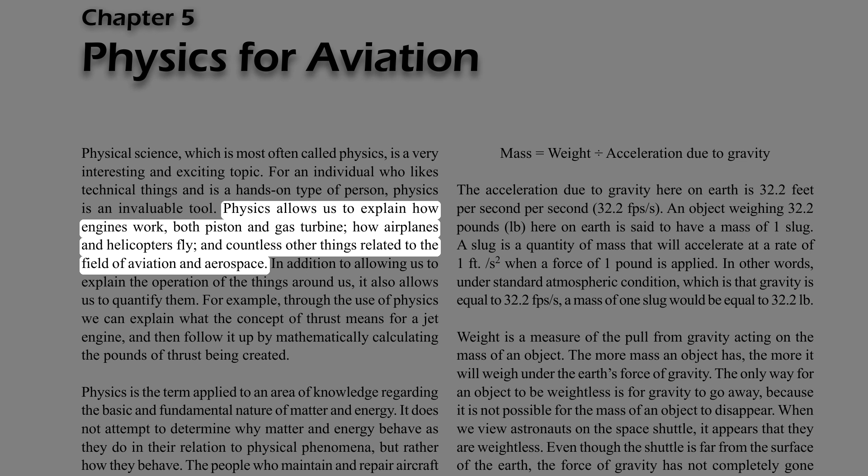In addition to allowing us to explain the operation of the things around us, it also allows us to quantify them. For example, through the use of physics we can explain what the concept of thrust means for a jet engine, and then follow it up by mathematically calculating the pounds of thrust being created.

Physics is the term applied to an area of knowledge regarding the basic and fundamental nature of matter and energy. It does not attempt to determine why matter and energy behave as they do in their relation to physical phenomena, but rather how they behave.

The people who maintain and repair aircraft should have knowledge of basic physics, which is sometimes called the science of matter and energy. Matter is the foundation, or the building blocks, for any discussion of physics. According to the dictionary, matter is what all things are made of, whatever occupies space, has mass, and is perceptible to the senses in some way.

According to the law of conservation, matter cannot be created or destroyed, although it is possible to change its physical state. When liquid gasoline vaporizes and mixes with air, and then burns, it might seem that this piece of matter has disappeared and no longer exists. Although it no longer exists in the state of liquid gasoline, the matter still exists in the form of the gases given off by the burning fuel.

Characteristics of matter: mass and weight. Mass is a measure of the quantity of matter in an object. In other words, how many molecules are in the object, how many atoms are in the object, or to be more specific, how many protons, neutrons, and electrons are in the object.

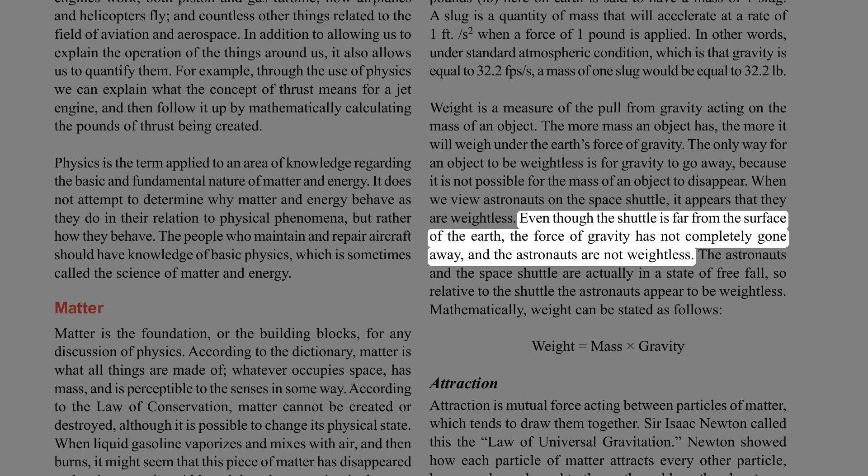When we view astronauts on the space shuttle, it appears that they are weightless. Even though the shuttle is far from the surface of the Earth, the force of gravity has not completely gone away, and the astronauts are not weightless. The astronauts and the space shuttle are actually in a state of free fall, so relative to the shuttle the astronauts appear to be weightless.

Mathematically, weight can be stated as follows: weight equals mass times gravity.

Attraction is a mutual force acting between particles of matter, which tends to draw them together. Sir Isaac Newton called this the law of universal gravitation. Newton showed how each particle of matter attracts every other particle, how people are bound to the Earth, and how the planets are attracted in the solar system.

Porosity means having pores or spaces where smaller particles may fit when a mixture takes place. This is sometimes referred to as granular, consisting or appearing to consist of small grains or granules.

Impenetrability means that no two objects can occupy the same place at the same time. Thus, two portions of matter cannot at the same time occupy the same space.

Density is the weight of a substance per unit volume. The unit volume selected for use in the English system of measurement is 1 cubic foot (ft³). In the metric system, it is 1 cubic centimeter (cm³).

Density is expressed in pounds per cubic foot or grams per cubic centimeter. To find the density of a substance, its weight and volume must be known. Its weight is then divided by its volume to find the weight per unit volume.

For example, the liquid which fills a certain container weighs 1,497.6 lb. The container is 4 feet long, 3 feet wide and 2 feet deep. Its volume is 24 cubic feet: 4 feet times 3 feet times 2 feet. If 24 cubic feet of liquid weighs 1,497.6 pounds, then 1 cubic foot weighs 1,497.6 divided by 24, or 62.4 lb. Therefore, the density of the liquid is 62.4 pounds per cubic foot.

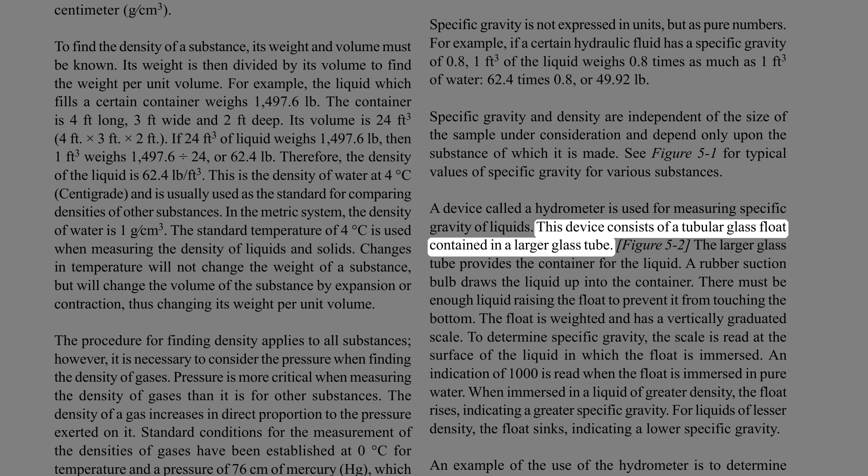See Figure 5:1 for typical values of specific gravity for various substances. A device called a hydrometer is used for measuring specific gravity of liquids. This device consists of a tubular glass float contained in a larger glass tube, which provides the container for the liquid. A rubber suction bulb draws the liquid up into the container.

There must be enough liquid raising the float to prevent it from touching the bottom. The float is weighted and has a vertically graduated scale. To determine specific gravity, the scale is read at the surface of the liquid in which the float is immersed. An indication of 1000 is read when the float is immersed in pure water. When immersed in a liquid of greater density, the float rises, indicating a greater specific gravity. For liquids of lesser density, the float sinks, indicating a lower specific gravity.

An example of the use of the hydrometer is to determine the specific gravity of the electrolyte, battery liquid, in an aircraft battery. When a battery is discharged, the calibrated float immersed in the electrolyte will indicate approximately 1150. The indication of a charged battery is between 1275 and 1310. These values represent 1.150, 1.275, and 1.310. The electrolyte in a discharged battery is 1.15 times denser than water, and in a charged battery 1.275 to 1.31 times denser than water.

Energy is typically defined as something that gives us the capacity to perform work. As individuals, saying that we feel full of energy is an indicator that we can perform a lot of work. Energy can be classified as one of two types, either as potential energy or kinetic energy.

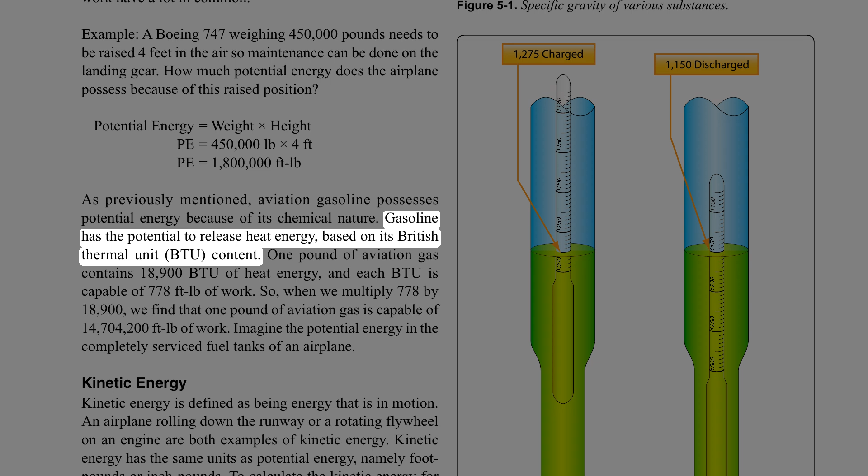As previously mentioned, aviation gasoline possesses potential energy because of its chemical nature. Gasoline has the potential to release heat energy, based on its British thermal unit, or BTU, content. One pound of aviation gas contains 18,900 BTU of heat energy, and each BTU is capable of 778 foot-pounds of work. So when we multiply 778 by 18,900, we find that 1 pound of aviation gas is capable of 14,704,200 foot-pounds of work. Imagine the potential energy in the completely serviced fuel tanks of an airplane.

Kinetic energy is defined as energy that is in motion. An airplane rolling down the runway or a rotating flywheel on an engine are both examples of kinetic energy. Kinetic energy has the same units as potential energy, namely foot-pounds or inch-pounds.

To calculate the kinetic energy for something in motion, the following formula is used: kinetic energy equals one-half mass times velocity squared. To use the formula, we show the mass as weight divided by gravity, and the velocity of the object will be in feet per second. This is necessary to end up with units in foot-pounds.

Example: an Airbus A380 weighing 600,000 pounds is moving down the runway on its takeoff roll with a velocity of 200 feet per second. How many foot-pounds of kinetic energy does the airplane possess?

Force, work, power, and torque. Force: before the concept of work, power, or torque can be discussed, we need to understand what force means. According to the dictionary, force is the intensity of an impetus, or the intensity of an input.

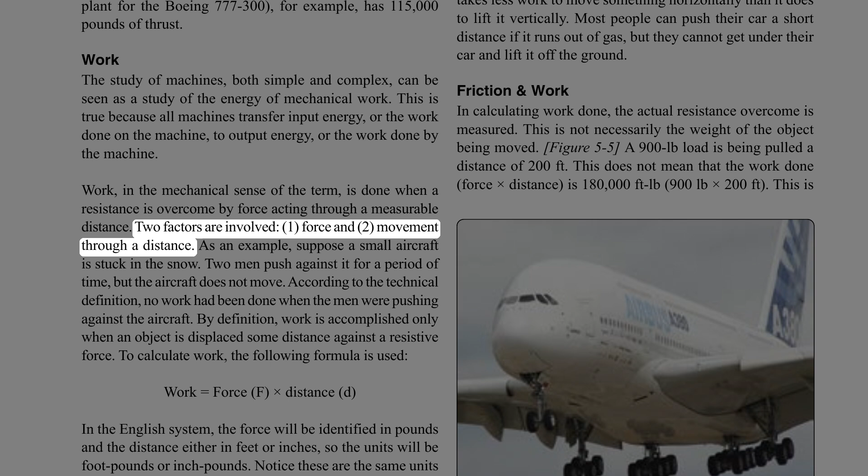As an example, suppose a small aircraft is stuck in the snow. Two men push against it for a period of time, but the aircraft does not move. According to the technical definition, no work had been done when the men were pushing against the aircraft. By definition, work is accomplished only when an object is displaced some distance against a resistive force. To calculate work, the following formula is used.

Work equals force, F, times distance, D. In the English system, the force will be identified in pounds and the distance either in feet or inches, so the units will be foot-pounds or inch-pounds. Notice these are the same units that were used for potential and kinetic energy.

In the metric system, the force is identified in newtons, N, and the distance in meters, with the resultant units being joules. 1 pound of force is equal to 4.448 N and 1 meter is equal to 3.28 feet. 1 joule is equal to 0.74 foot-pounds.

Example: How much work is accomplished by jacking a 150,000-pound Airbus A320 airplane a vertical height of 4 feet?

Example: How much work is accomplished when a tow tractor is hooked up to a tow bar and a Boeing 737-800 airplane weighing 130,000 pounds is pushed 80 feet into the hangar? The force on the tow bar is 5,000 lb.

In this last example, notice the force does not equal the weight of the airplane. This is because the airplane is being moved horizontally and not lifted vertically. In almost all cases, it takes less work to move something horizontally than it does to lift it vertically. Most people can push their car a short distance if it runs out of gas, but they cannot get under their car and lift it off the ground.

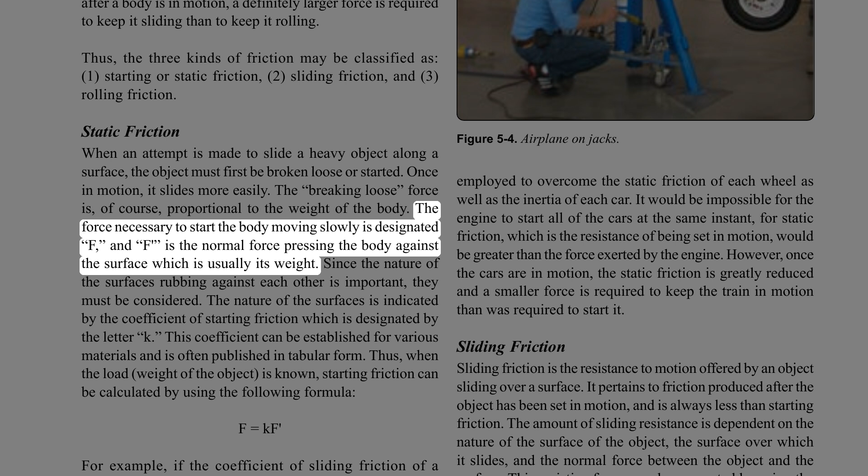Static friction. When an attempt is made to slide a heavy object along a surface, the object must first be broken loose or started. Once in motion, it slides more easily. The breaking loose force is, of course, proportional to the weight of the body. The force necessary to start the body moving slowly is designated F, and F is the normal force pressing the body against the surface, which is usually its weight.

Since the nature of the surfaces rubbing against each other is important, they must be considered. The nature of the surfaces is indicated by the coefficient of starting friction, which is designated by the letter K. This coefficient can be established for various materials and is often published in tabular form. Thus, when the load, weight of the object, is known, starting friction can be calculated by using the following formula.

For example, if the coefficient of sliding friction of a smooth iron block on a smooth, horizontal surface is 0.3, the force required to start a 10-pound block would be 3 pounds, and a 40-pound block, 12 lb. Starting friction for objects equipped with wheels and roller bearings is much smaller than that for sliding objects.

For example, a locomotive would have difficulty getting a long train of cars in motion all at one time. Therefore, the couplings between the cars are purposely made to have a few inches of play. When starting the train, the engineer backs the engine until all the cars are pushed together. Then, with a quick start forward, the first car is set in motion. This technique is employed to overcome the static friction of each wheel as well as the inertia of each car.

It would be impossible for the engine to start all of the cars at the same instant, for static friction, which is the resistance of being set in motion, would be greater than the force exerted by the engine. However, once the cars are in motion, the static friction is greatly reduced and a smaller force is required to keep the train in motion than was required to start it.

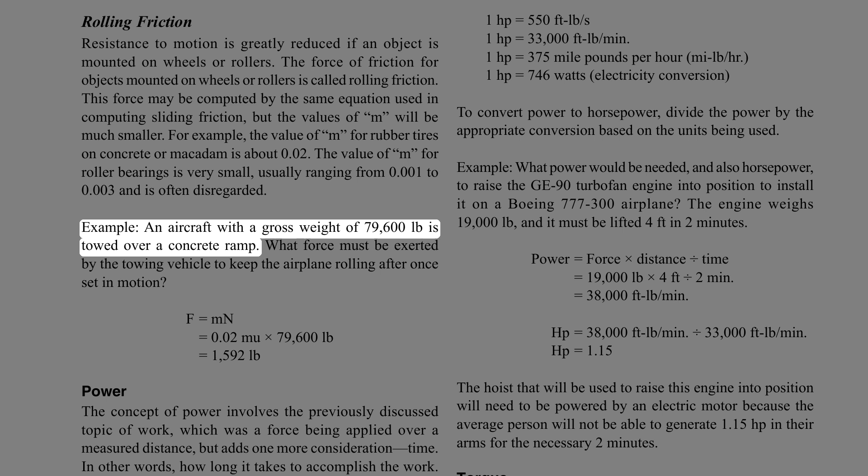Example: an aircraft with a gross weight of 79,600 pounds is towed over a concrete ramp. What force must be exerted by the towing vehicle to keep the airplane rolling after once set in motion?

Power. The concept of power involves the previously discussed topic of work, which was a force being applied over a measured distance, but adds one more consideration: time. In other words, how long it takes to accomplish the work.

If someone asked the average person if they could lift 1 million pounds 5 feet off the ground, the answer most assuredly would be no. This person would probably assume that they are to lift it all at once. What if they are given 365 days to lift it, and could lift small amounts of weight at a time?

The work involved would be the same, regardless of how long it took to lift the weight, but the power required is different. If the weight is to be lifted in a shorter period of time, it will take more power. The formula for power is as follows.

The units for power will be foot-pounds per minute, foot-pounds per second, inch-pounds per minute or second, and possibly mile-pounds per hour. The units depend on how distance and time are measured.

Many years ago, there was a desire to compare the power of the newly evolving steam engine to that of horses. People wanted to know how many horses the steam engine was equivalent to.

The value we know currently as 1 horsepower, HP, was developed, and it is equal to 550 foot-pounds per second, because of this. It was found that the average horse could lift a weight of 550 pounds, 1 foot off the ground, in 1 second. The values we use today, in order to convert power to horsepower, are as follows.

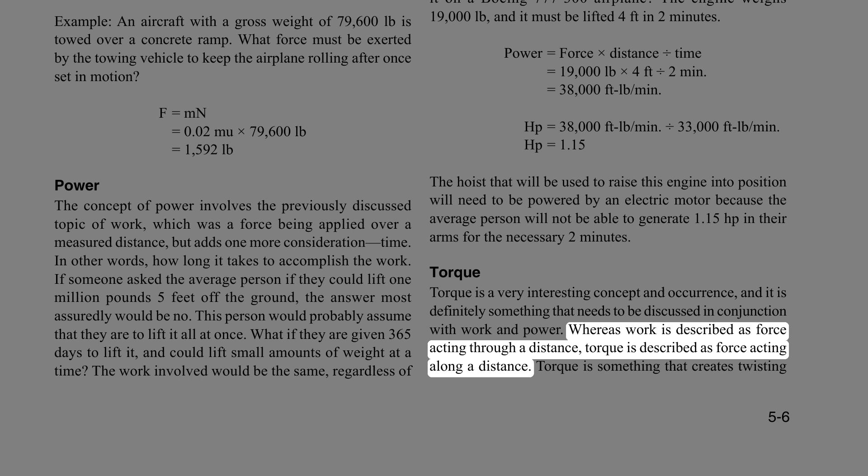Torque. Torque is a very interesting concept and occurrence, and it is definitely something that needs to be discussed in conjunction with work and power. Whereas work is described as force acting through a distance, torque is described as force acting along a distance. Torque is something that creates twisting and tries to make something rotate.

If we push on an object with a force of 10 pounds and it moves 10 inches in a straight line, we have done 100 inch-pounds of work.

By comparison, if we have a wrench 10 inches long that is on a bolt, and we push down on it with a force of 10 pounds, a torque of 100 pound-inches is applied to the bolt. If the bolt was already tight and did not move as we pushed down on the wrench, the torque of 100 pound-inches would still exist.

The formula for torque is torque equals force times distance. Even though this formula looks the same as the formula for calculating work, recognize that the distance value here is not the linear distance an object moves, but rather the distance along which the force is applied. With torque, nothing had to move, because the force is applied along a distance, not through a distance. Although the units of work and torque appear the same, they are not. The units of work are inch-pounds, and the units of torque are pound-inches, and that is what differentiates the two.

Torque is very important when thinking about how engines work, both piston engines and gas turbine engines. Both types of engines create torque in advance of being able to create work or power.

With a piston engine, a force in pounds pushes down on the top of the piston and tries to make it move. The piston is attached to the connecting rod, which is attached to the crankshaft at an offset. That offset would be like the length of the wrench discussed earlier, and the force acting along that length is what creates torque.

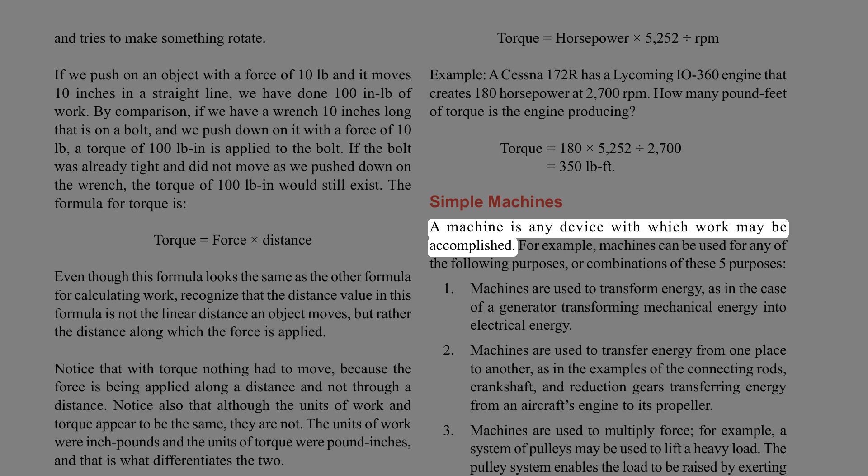Simple machines. A machine is any device with which work may be accomplished. Machines can be used for any of the following purposes, or combinations of these purposes.

Machines are used to transform energy, as in the case of a generator transforming mechanical energy into electrical energy. Machines are used to transfer energy from one place to another, as in the examples of the connecting rods, crankshaft, and reduction gears transferring energy from an aircraft's engine to its propeller.

Machines are used to multiply force. For example, a system of pulleys may be used to lift a heavy load. The pulley system enables the load to be raised by exerting a force that is smaller than the weight of the load.

Machines can be used to multiply speed. A good example is the bicycle, by which speed can be gained by exerting a greater force.

Machines can be used to change the direction of a force. An example of this use is the flag hoist. A downward force on one side of the rope exerts an upward force on the other side, raising the flag toward the top of the pole.

There are only 6 simple machines: the lever, the pulley, the wheel and axle, the inclined plane, the screw, and the gear. Physicists, however, recognize only 2 basic principles in machines, the lever and the inclined plane. The pulley, block and tackle, the wheel and axle, and gears operate on the machine principle of the lever. The wedge and the screw use the principle of the inclined plane.

An understanding of the principles of simple machines provides a necessary foundation for the study of compound machines, which are combinations of 2 or more simple machines.

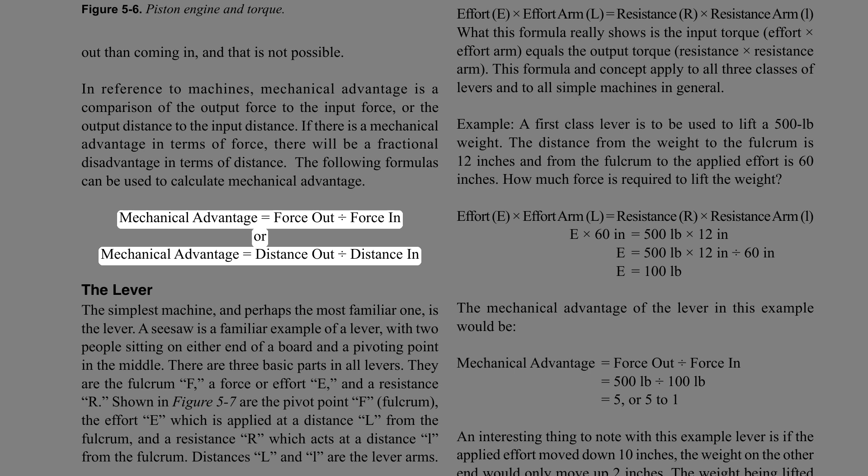The lever. The simplest machine, and perhaps the most familiar one, is the lever. A seesaw is a familiar example of a lever, with 2 people sitting on either end of a board and a pivoting point in the middle.

There are 3 basic parts in all levers: the fulcrum, F, a force or effort, E, and a resistance, R. Shown in figure 5-7 are the pivot point, F, fulcrum, the effort, E, which is applied at a distance, L, from the fulcrum, and a resistance, R, which acts at a distance, L, from the fulcrum. Distances, L, and L, are the lever arms.

The concept of torque was discussed earlier in this chapter, and torque is very much involved in the operation of a lever. When a person sits on one end of a seesaw, that person applies a downward force in pounds which acts along the distance to the center of the seesaw. This combination of force and distance creates torque, which tries to cause rotation.

First-class lever. In the first-class lever, the fulcrum is located between the effort and the resistance. As mentioned earlier, the seesaw is a good example of a lever, and it happens to be a first-class lever. The amount of weight and the distance from the fulcrum can be varied to suit the need. Increasing the distance from the applied effort to the fulcrum, compared to the distance from the fulcrum to the weight being moved, increases the advantage provided by the lever.

Crowbars, shears, and pliers are common examples of this class of lever. The proper balance of an airplane is also a good example, with the center of lift on the wing being the pivot point, or fulcrum, and the weight fore and aft of this point being the effort and the resistance.

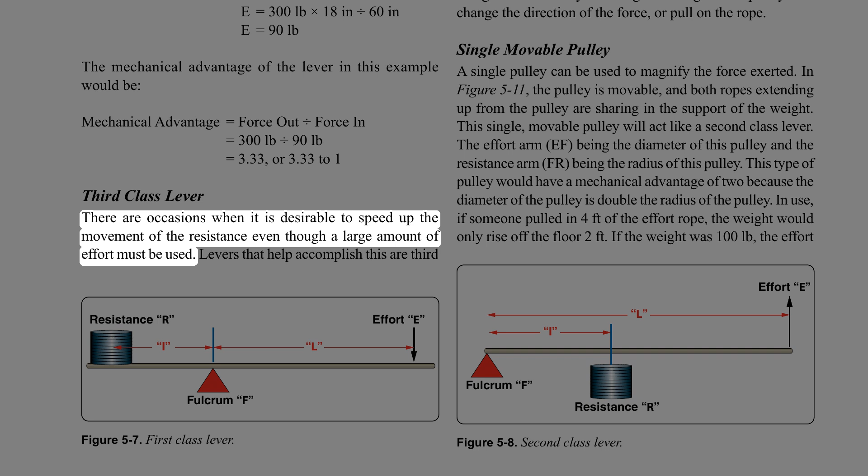There are occasions when it is desirable to speed up the movement of the resistance even though a large amount of effort must be used. Levers that help accomplish this are third-class levers.

As shown in Figure 5-9, the fulcrum is at one end of the lever and the weight or resistance to be overcome is at the other end, with the effort applied at some point between. Third-class levers are easily recognized because the effort is applied between the fulcrum and the resistance.

The retractable main landing gear on an airplane is a good example of a third-class lever. The top of the landing gear, where it attaches to the airplane, is the pivot point. The wheel and brake assembly at the bottom of the landing gear is the resistance. The hydraulic actuator that makes the gear retract is attached somewhere in the middle, and that is the applied effort.

The pulley. Pulleys are simple machines in the form of a wheel mounted on a fixed axis and supported by a frame. The wheel, or disc, is normally grooved to accommodate a rope. The wheel is sometimes referred to as a sheave, or sometimes sheaf. The frame that supports the wheel is called a block.

A block and tackle consists of a pair of blocks. Each block contains one or more pulleys and a rope connecting the pulleys of each block.

Single fixed pulley. A single fixed pulley is really a first-class lever with equal arms. In Figure 5-10, the arm from point R to point F is equal to the arm from point F to point E, with both distances being equal to the radius of the pulley. When a first-class lever has equal arms, the mechanical advantage is 1.

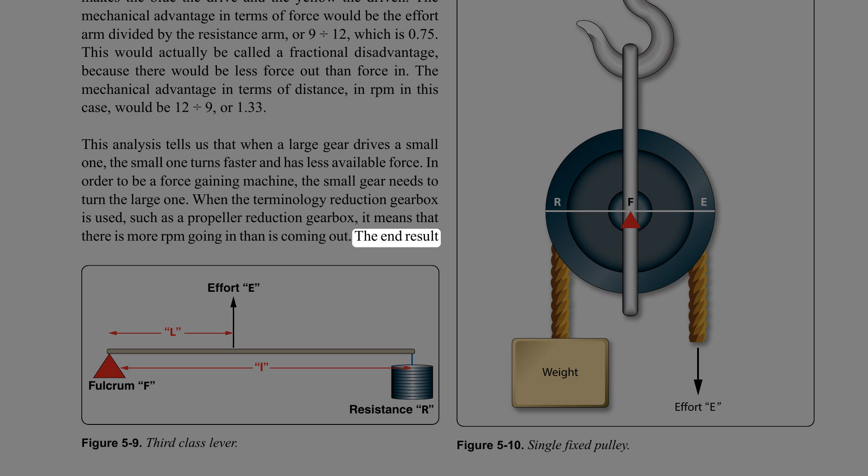In order to be a force-gaining machine, the small gear needs to turn the large one. When the terminology reduction gearbox is used, such as a propeller reduction gearbox, it means that there is more RPM going in than is coming out. The end result is an increase in force and ultimately torque.

Bevel gears are used to change the plane of rotation, so that a shaft turning horizontally can make a vertical shaft rotate. The size of the gears and their number of teeth determine the mechanical advantage, and whether force is being increased or RPM is being increased. If each gear has the same number of teeth, there would be no change in force or RPM.

The worm gear has an extremely high mechanical advantage. The input force goes into the spiral worm gear, which drives the spur gear. One complete revolution of the worm gear only makes the spur gear move an amount equal to one tooth. The mechanical advantage is equal to the number of teeth on the spur gear, which in this case there are 25. This is a force-gaining machine, to the tune of 25 times more output force.

The planetary sun gear system is typical of what would be found in a propeller reduction gearbox. The power output shaft of the engine would drive the sun gear in the middle, which rotates the planetary gears and ultimately the ring gear.

In this example, the sun gear has 28 teeth, each planet gear has 22 teeth, and the ring gear has 82 teeth. To figure how much gear reduction is taking place, the number of teeth on the ring gear is divided by the number of teeth on the sun gear. In this case, the gear reduction is 2.93, meaning the engine has an RPM 2.93 times greater than the propeller.

Inclined plane. The inclined plane is a simple machine that facilitates the raising or lowering of heavy objects by application of a small force over a relatively long distance.

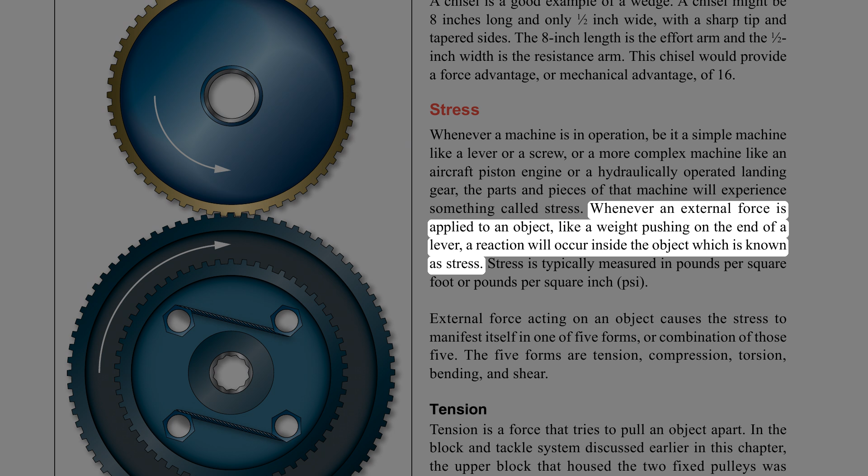Whenever an external force is applied to an object, like a weight pushing on the end of a lever, a reaction will occur inside the object which is known as stress. Stress is typically measured in pounds per square foot or pounds per square inch, psi.

External force acting on an object causes the stress to manifest itself in one of five forms, or a combination of those five: tension, compression, torsion, bending, and shear. Tension is a force that tries to pull an object apart.

In the block and tackle system discussed earlier in this chapter, the upper block that housed the two fixed pulleys was secured to an overhead beam. The movable lower block and its two pulleys were hanging by ropes, and the weight was hanging below the entire assembly. The weight being lifted would cause the ropes and the blocks to be under tension. The weight is literally trying to pull the rope apart, and ultimately would cause the rope to break if the weight was too great.

Compression is a force that tries to crush an object. An excellent example of compression is when a sheet metal airplane is assembled using the fastener known as a rivet. The rivet passes through a hole drilled in the pieces of aluminum, and then a rivet gun on one side and a bucking bar on the other apply a force. This applied force tries to crush the rivet, and makes it expand to fill the hole and securely hold the aluminum pieces together.

Torsion is the stress an object experiences when it is twisted, which is what happens when torque is applied to a shaft. Torsion is made up of two other stresses, tension and compression. When a shaft is twisted, tension is experienced at a diagonal to the shaft and compression acts 90 degrees to the tension.

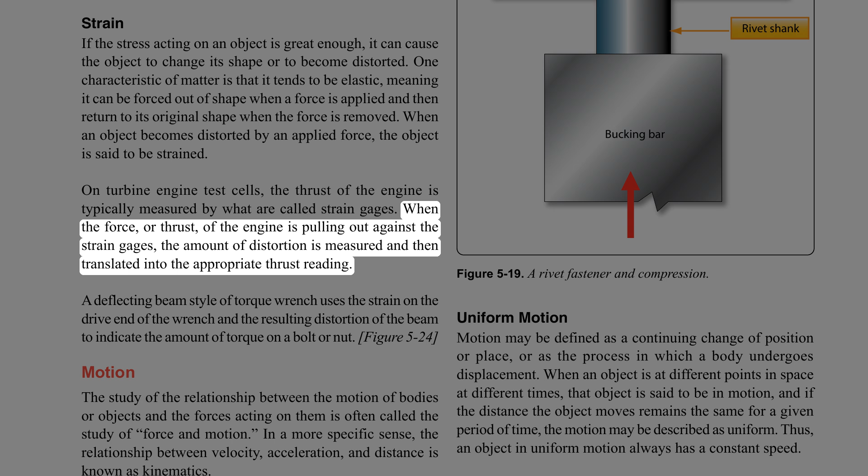On turbine engine test cells, the thrust of the engine is typically measured by what are called strain gauges. When the force or thrust of the engine is pulling out against the strain gauges, the amount of distortion is measured and then translated into the appropriate thrust reading. A deflecting beam style of torque wrench uses the strain on the drive end of the wrench and the resulting distortion of the beam to indicate the amount of torque on a bolt or nut.

Motion: the study of the relationship between the motion of bodies or objects and the forces acting on them is often called the study of force and motion. In a more specific sense, the relationship between velocity, acceleration, and distance is known as kinematics.

Uniform motion. Motion may be defined as a continuing change of position or place, or as the process in which a body undergoes displacement. When an object is at different points in space at different times, that object is said to be in motion, and if the distance the object moves remains the same for a given period of time, the motion may be described as uniform. Thus, an object in uniform motion always has a constant speed.

Speed and velocity. In everyday conversation, speed and velocity are often used as if they mean the same thing. In physics, they have definite and distinct meanings. Speed refers to how fast an object is moving, or how far the object will travel in a specific time. The speed of an object tells nothing about the direction an object is moving.

For example, if the information is supplied that an airplane leaves New York City and travels 8 hours at a speed of 150 miles per hour, this information tells nothing about the direction in which the airplane is moving. At the end of 8 hours, it might be in Kansas City, or if it traveled in a circular route, it could be back in New York City.

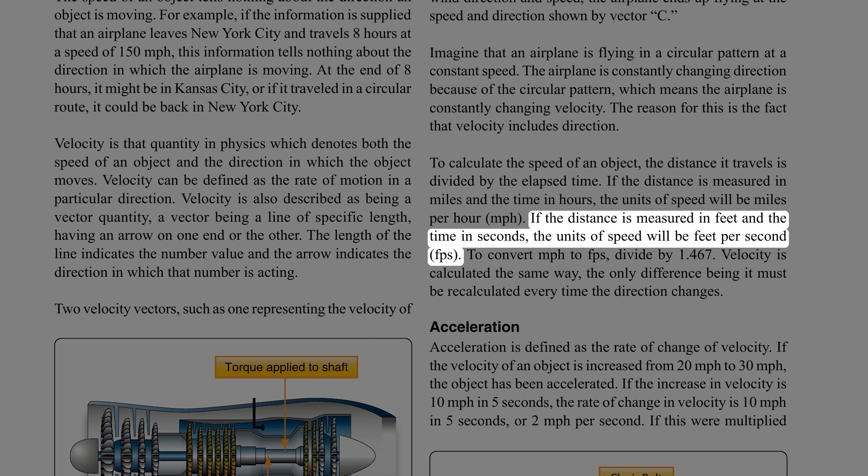To calculate the speed of an object, the distance it travels is divided by the elapsed time. If the distance is measured in miles and the time in hours, the units of speed will be miles per hour, mph. If the distance is measured in feet and the time in seconds, the units of speed will be feet per second, fps. To convert mph to fps, divide by 1.467.

Velocity is calculated the same way, the only difference being it must be recalculated every time the direction changes.

Acceleration. Acceleration is defined as the rate of change of velocity. If the velocity of an object is increased from 20 miles per hour to 30 miles per hour, the object has been accelerated. If the increase in velocity is 10 miles per hour in 5 seconds, the rate of change in velocity is 10 miles per hour in 5 seconds, or 2 miles per hour per second. If this were multiplied by 1.467, it could also be expressed as an acceleration of 2.93 feet per second squared, fps squared. By comparison, the acceleration due to gravity is 32.2 fps squared.

To calculate acceleration, the following formula is used. Example: an Air Force F-15 fighter is cruising at 400 miles per hour. The pilot advances the throttles to full afterburner and accelerates to 1,200 miles per hour in 20 seconds. What is the average acceleration in miles per hour per second and in fps squared?

In the example just shown, the acceleration was found to be 58.7 fps squared. Since 32.2 fps squared is equal to the acceleration due to gravity, divide the F-15's acceleration by 32.2 to find out how many g-forces the pilot is experiencing. In this case, it would be 1.82 g's.

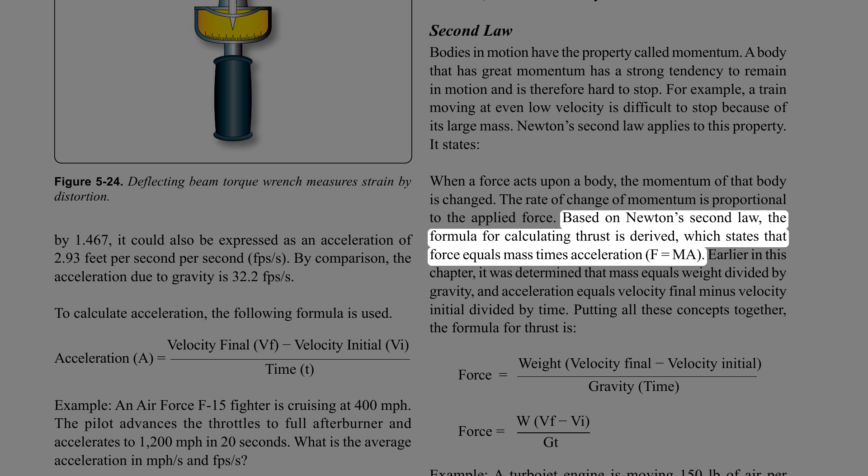Based on Newton's second law, the formula for calculating thrust is derived, which states that force equals mass times acceleration, F equals ma. Earlier in this chapter, it was determined that mass equals weight divided by gravity, and acceleration equals velocity final minus velocity initial divided by time.

Putting all these concepts together, the formula for thrust is derived. Example: a turbojet engine is moving 150 pounds of air per second through the engine. The air enters going 100 fps and leaves going 1200 fps. How much thrust, in pounds, is the engine creating?

Third law. Newton's third law of motion is often called the law of action and reaction. It states that for every action there is an equal and opposite reaction. This means that if a force is applied to an object, the object will supply a resistive force exactly equal to and in the opposite direction of the force applied.

It is easy to see how this might apply to objects at rest. In application, as a man stands on the floor, the floor exerts a force against his feet exactly equal to his weight. This law is also applicable when a force is applied to an object in motion.

Forces always occur in pairs. The term acting force means the force one body exerts on a second body, and reacting force means the force the second body exerts on the first.

When an aircraft propeller pushes a stream of air backward with a force of 500 pounds, the air pushes the blades forward with a force of 500 lb. This forward force causes the aircraft to move forward.

A turbofan engine exerts a force on the air entering the inlet duct, causing it to accelerate out the fan duct and the tailpipe. The air accelerating to the rear is the action, and the force inside the engine that makes it happen is the reaction, also called thrust.

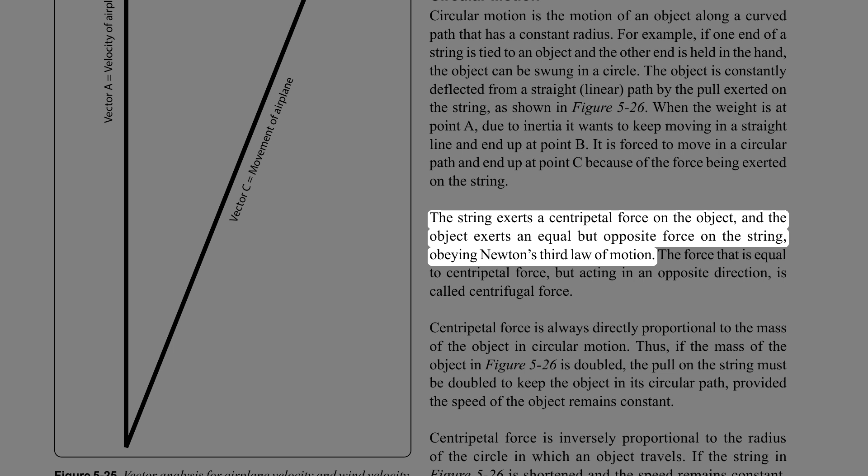It is forced to move in a circular path and end up at point C because of the force being exerted on the string. The string exerts a centripetal force on the object, and the object exerts an equal but opposite force on the string, obeying Newton's third law of motion.

The force that is equal to centripetal force, but acting in an opposite direction, is called centrifugal force. Centripetal force is always directly proportional to the mass of the object in circular motion. Thus, if the mass of the object in figure 5-26 is doubled, the pull on the string must be doubled to keep the object in its circular path, provided the speed of the object remains constant.

Centripetal force is inversely proportional to the radius of the circle in which an object travels. If the string in figure 5-26 is shortened and the speed remains constant, the pull on the string must be increased since the radius is decreased, and the string must pull the object from its linear path more rapidly.

Using the same reasoning, the pull on the string must be increased if the object is swung more rapidly in its orbit. Centripetal force is thus directly proportional to the square of the velocity of the object. The formula for centripetal force is: centripetal force equals mass times velocity squared, divided by radius.

For the formula above, mass would typically be converted to weight divided by gravity, velocity would be in feet per second, and the radius would be in feet.

Example: what would the centripetal force be if a 10-pound weight was moving in a 3 ft radius circular path at a velocity of 500 fps?

In the condition identified in the example, the object acts like it weighs 2,588 times more than it actually does. It can also be said that the object is experiencing 2,588 Gs, or force of gravity. The fan blades in a large turbofan engine, when operating at maximum RPM, are experiencing many thousands of Gs for the same reason.

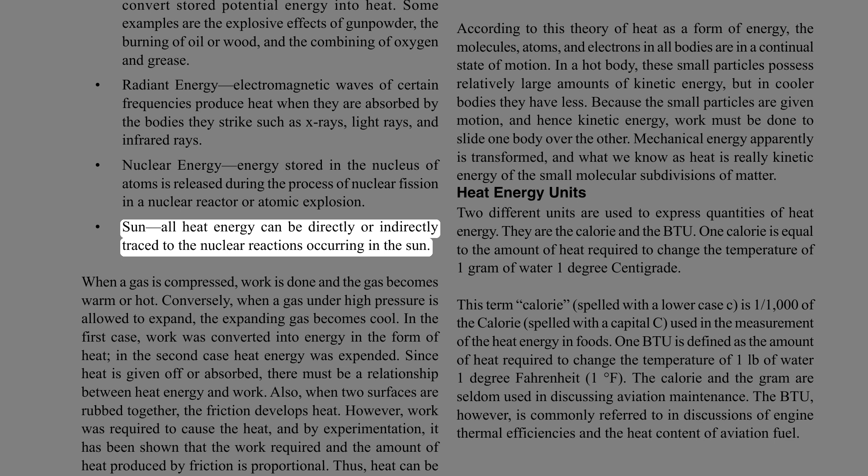Nuclear energy. Energy stored in the nucleus of atoms is released during the process of nuclear fission in a nuclear reactor or atomic explosion. Sun: all heat energy can be directly or indirectly traced to the nuclear reactions occurring in the sun.

When a gas is compressed, work is done and the gas becomes warm or hot. Conversely, when a gas under high pressure is allowed to expand, the expanding gas becomes cool. In the first case, work was converted into energy in the form of heat. In the second case, heat energy was expended. Since heat is given off or absorbed, there must be a relationship between heat energy and work.

Also, when two surfaces are rubbed together, the friction develops heat. However, work was required to cause the heat, and by experimentation it has been shown that the work required and the amount of heat produced by friction is proportional. Thus, heat can be regarded as a form of energy.

According to this theory of heat as a form of energy, the molecules, atoms, and electrons in all bodies are in a continual state of motion. In a hot body, these small particles possess relatively large amounts of kinetic energy, but in cooler bodies they have less. Because the small particles are given motion, and hence kinetic energy, work must be done to slide one body over the other. Mechanical energy apparently is transformed, and what we know as heat is really kinetic energy of the small molecular subdivisions of matter.

Heat energy units: two different units are used to express quantities of heat energy. They are the calorie and the BTU. One calorie is equal to the amount of heat required to change the temperature of 1 gram of water 1 degree centigrade. The term calorie, spelled with a lowercase c, is 1/1000th of the Calorie, spelled with a capital C, used in the measurement of the heat energy in foods.

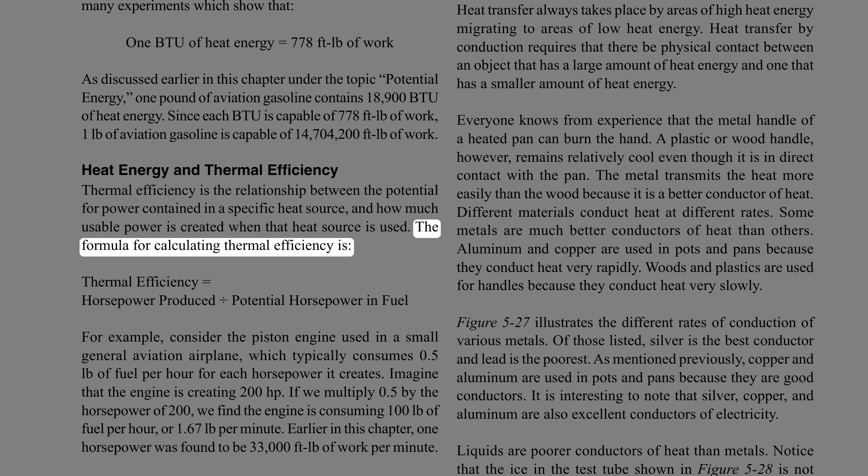The formula for calculating thermal efficiency is thermal efficiency equals horsepower produced divided by potential horsepower in fuel.

For example, consider the piston engine used in a small general aviation airplane, which typically consumes 0.5 pounds of fuel per hour for each horsepower it creates. Imagine that the engine is creating 200 horsepower. If we multiply 0.5 by the horsepower of 200, we find the engine is consuming 100 pounds of fuel per hour, or 1.67 pounds per minute.

Earlier in this chapter, 1 horsepower was found to be 33,000 feet lb of work per minute. The potential horsepower in the fuel burned for this example engine would be calculated. The example engine is burning enough fuel that it has the potential to create 744 horsepower, but it is only creating 200. The thermal efficiency of the engine would be such that more than 70% of the energy in the fuel is not being used to create usable horsepower.

The wasted energy is in the form of friction and heat. A tremendous amount of heat is given up to the atmosphere and not used inside the engine to create power.

Heat transfer. There are three methods by which heat is transferred from one location to another or from one substance to another. These three methods are conduction, convection, and radiation.

Conduction. Heat transfer always takes place by areas of high heat energy migrating to areas of low heat energy. Heat transfer by conduction requires that there be physical contact between an object that has a large amount of heat energy and one that has a smaller amount of heat energy.

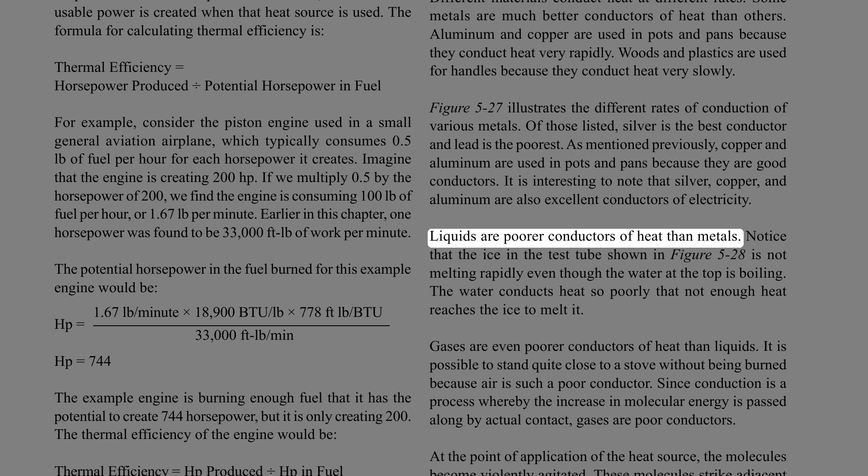Liquids are poorer conductors of heat than metals. Notice that the ice in the test tube shown in figure 5-28 is not melting rapidly even though the water at the top is boiling. The water conducts heat so poorly that not enough heat reaches the ice to melt it.

Gases are even poorer conductors of heat than liquids. It is possible to stand quite close to a stove without being burned because air is such a poor conductor.

Since conduction is a process whereby the increase in molecular energy is passed along by actual contact, gases are poor conductors. At the point of application of the heat source, the molecules become violently agitated. These molecules strike adjacent molecules, causing them to become agitated. This process continues until the heat energy is distributed evenly throughout the substance. The gases are much poorer conductors of heat because molecules are farther apart in gases than in solids.

Materials that are poor conductors are used to prevent the transfer of heat and are called heat insulators. A wooden handle on a pot or a soldering iron serves as a heat insulator. Certain materials, such as finely spun glass or asbestos, are particularly poor heat conductors. These materials are therefore used for many types of insulation.

Convection. Convection is the process by which heat is transferred by movement of a heated fluid, gas or liquid. For example, an incandescent light bulb will, when heated, become increasingly hotter until the air surrounding it begins to move. The motion of the air is upward. This upward motion of the heated air carries the heat away from the hot light bulb by convection.

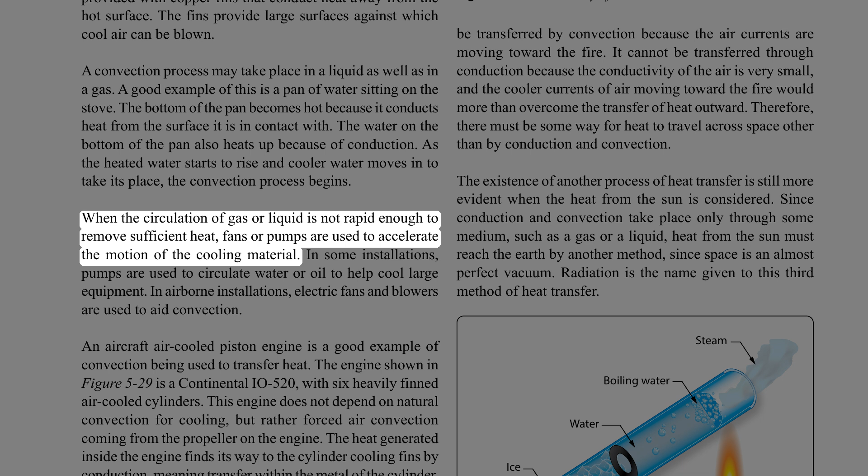When the circulation of gas or liquid is not rapid enough to remove sufficient heat, fans or pumps are used to accelerate the motion of the cooling material. In some installations, pumps are used to circulate water or oil to help cool large equipment. In airborne installations, electric fans and blowers are used to aid convection.

An aircraft air-cooled piston engine is a good example of convection being used to transfer heat. The engine shown in figure 5-29 is a Continental IO-520, with 6 heavily finned air-cooled cylinders. This engine does not depend on natural convection for cooling, but rather forced air convection coming from the propeller on the engine. The heat generated inside the engine finds its way to the cylinder cooling fins by conduction, meaning transfer within the metal of the cylinder. Once the heat gets to the fins, forced air flowing around the cylinders carries the heat away.

Radiation. Conduction and convection cannot wholly account for some of the phenomena associated with heat transfer. For example, the heat one feels when sitting in front of an open fire cannot be transferred by convection because the air currents are moving toward the fire. It cannot be transferred through conduction because the conductivity of the air is very small, and the cooler currents of air moving toward the fire would more than overcome the transfer of heat outward. Therefore, there must be some way for heat to travel across space other than by conduction and convection.

The existence of another process of heat transfer is still more evident when the heat from the sun is considered. Since conduction and convection take place only through some medium, such as a gas or a liquid, heat from the sun must reach the Earth by another method, since space is an almost perfect vacuum. Radiation is the name given to this third method of heat transfer.

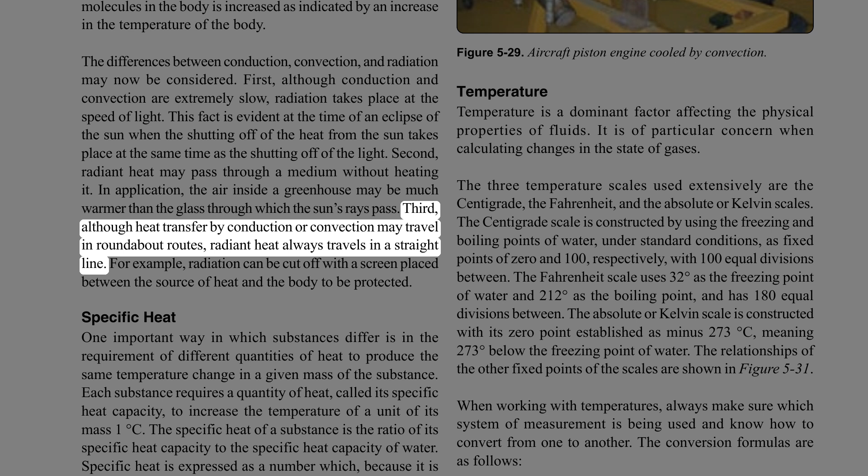Second, radiant heat may pass through a medium without heating it. For example, the air inside a greenhouse may be much warmer than the glass through which the sun's rays pass. Third, although heat transfer by conduction or convection may travel in roundabout routes, radiant heat always travels in a straight line. For example, radiation can be cut off with a screen placed between the source of heat and the body to be protected.

Specific heat. One important way in which substances differ is in the requirement of different quantities of heat to produce the same temperature change in a given mass of the substance. Each substance requires a quantity of heat, called its specific heat capacity, to increase the temperature of a unit of its mass 1 degree Celsius.

The specific heat of a substance is the ratio of its specific heat capacity to the specific heat capacity of water. Specific heat is expressed as a number which, because it is a ratio, has no units and applies to both the English and the metric systems. It is fortunate that water has a high specific heat capacity.

The larger bodies of water on the Earth keep the air and solid matter near the surface at a constant temperature. A great quantity of heat is required to change the temperature of a large lake or river. Therefore, when the temperature falls below that of such bodies of water, they give off large quantities of heat. This process keeps the atmospheric temperature at the surface of the Earth from changing rapidly. The specific heat values of some common materials are listed in Figure 5-30.

Temperature is a dominant factor affecting the physical properties of fluids. It is of particular concern when calculating changes in the state of gases. The three temperature scales used extensively are the centigrade, the Fahrenheit, and the absolute, or Kelvin, scales.

The centigrade scale is constructed using the freezing and boiling points of water, under standard conditions, as fixed points of 0 and 100 respectively, with 100 equal divisions between. The Fahrenheit scale uses 32 degrees as the freezing point of water and 212 degrees as the boiling point, with 180 equal divisions between.

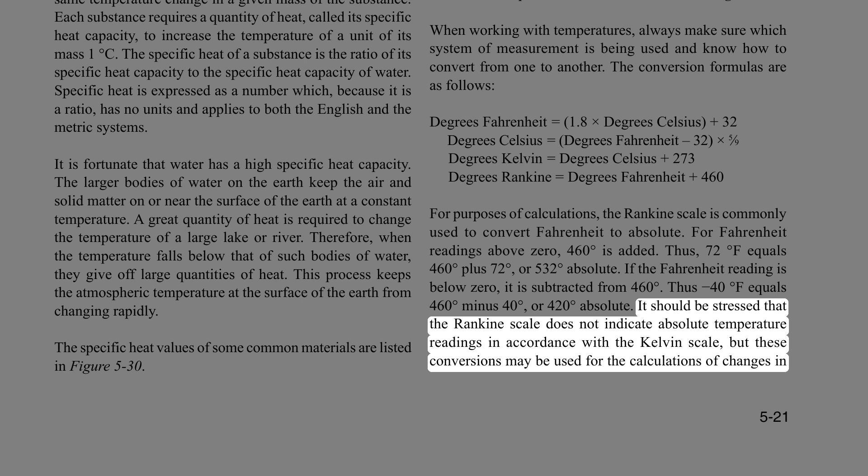If the Fahrenheit reading is below 0, it is subtracted from 460 degrees. Thus, -40 degrees Fahrenheit equals 460 minus 40, or 420 degrees absolute. It should be stressed that the Rankine scale does not indicate absolute temperature readings in accordance with the Kelvin scale, but these conversions may be used for calculations of changes in the state of gases.

The Kelvin and centigrade scales are used more extensively in scientific work. Therefore, some technical manuals may use these scales in giving directions and operating instructions. The Fahrenheit scale is commonly used in the United States, and most people are familiar with it. Therefore, the Fahrenheit scale is used in most areas of this book.

Thermal expansion and contraction take place in solids, liquids, and gases when they are heated. With few exceptions, solids will expand when heated and contract when cooled. The expansion of solids when heated is very slight compared to the expansion in liquids and gases, because the molecules of solids are much closer together and are more strongly attracted to each other. The expansion of fluids is discussed in the study of Boyle's law.

Thermal expansion in solids must be explained in some detail because of its close relationship to aircraft metals and materials. It is necessary to measure experimentally the exact rate of expansion of each substance, because some expand more than others. The amount that a unit length of any substance expands for a 1 degree rise in temperature is known as the coefficient of linear expansion for that substance. The coefficient of linear expansion for various materials is shown in Figure 5-32.

To estimate the expansion of any object, such as a steel rail, it is necessary to know three things about it: its length, the rise in temperature to which it is subjected, and its coefficient of expansion. This relationship is expressed by the equation: expansion equals coefficient times length times rise in temperature.

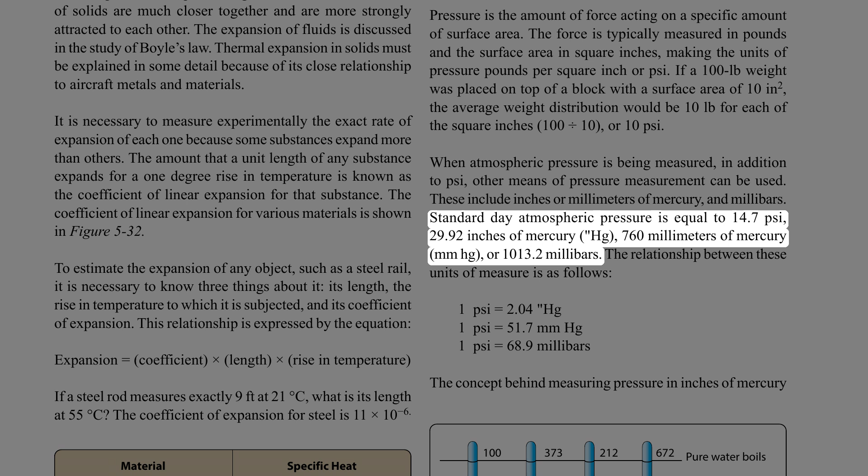When atmospheric pressure is being measured, in addition to psi, other means of pressure measurement can be used. These include inches or millimeters of mercury and millibars. Standard day atmospheric pressure is equal to 14.7 psi, 29.92 inches of mercury (Hg), 760 millimeters of mercury (mmHg), or 1013.2 millibars. The relationship between these units of measure is as follows: 1 psi equals 2.04 inches Hg, 1 psi equals 51.7 millimeters Hg, and 1 psi equals 68.9 millibars.

The concept behind measuring pressure in inches of mercury involves filling a test tube with liquid mercury and then covering the top. The test tube is then turned upside down and placed in an open container of mercury, and the top is uncovered. Gravity acting on the mercury in the test tube will try to make the mercury run out. Atmospheric pressure pushing down on the mercury in the open container tries to make the mercury stay in the test tube. At some point, these two forces, gravity and atmospheric pressure, will equal out and the mercury will stabilize at a certain height in the test tube.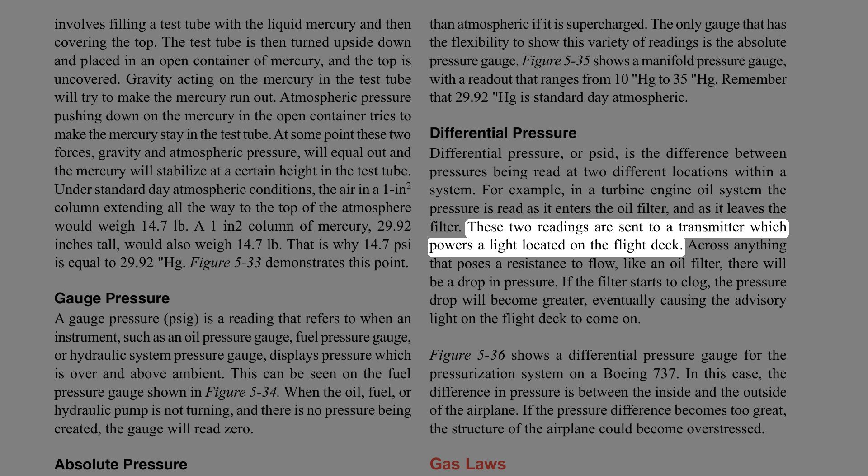Differential pressure, or PSID, is the difference between pressures being read at two different locations within a system. For example, in a turbine engine oil system, the pressure is read as it enters the oil filter and as it leaves the filter. These two readings are sent to a transmitter which powers a light located on the flight deck. Across anything that poses a resistance to flow, like an oil filter, there will be a drop in pressure. If the filter starts to clog, the pressure drop will become greater, eventually causing the advisory light on the flight deck to come on. Figure 5-36 shows a differential pressure gauge for the pressurization system on a Boeing 737.

In this case, the difference in pressure is between the inside and the outside of the airplane. If the pressure difference becomes too great, the structure of the airplane could become overstressed.

Gas laws. The simple structure of gases makes them readily adaptable to mathematical analysis, from which has evolved a detailed theory of the behavior of gases. This is called the kinetic theory of gases. The theory assumes that a body of gas is composed of identical molecules which behave like minute elastic spheres, spaced relatively far apart and continuously in motion.

The degree of molecular motion is dependent upon the temperature of the gas. Since the molecules are continuously striking against each other and against the walls of the container, an increase in temperature with the resulting increase in molecular motion causes a corresponding increase in the number of collisions between the molecules.

The increased number of collisions results in an increase in pressure because a greater number of molecules strike against the walls of the container in a given unit of time.

If the container were an open vessel, the gas would expand and overflow from the container. However, if the container is sealed and possesses elasticity, such as a rubber balloon, the increased pressure causes the container to expand.

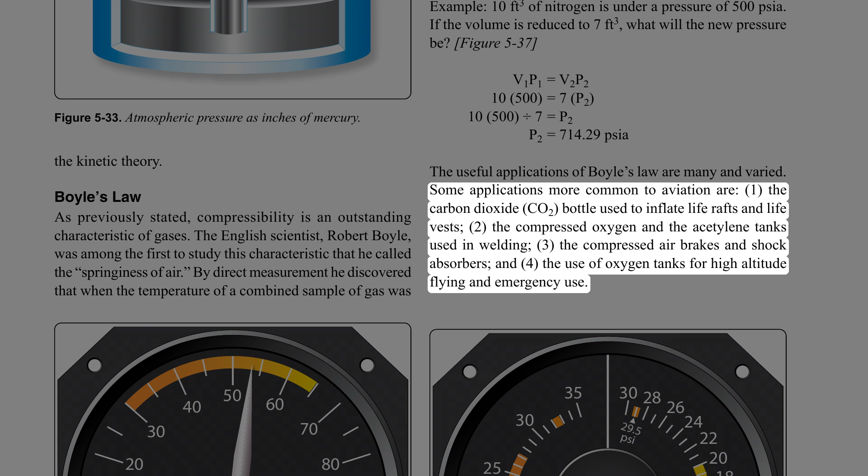Charles's law. The French scientist Jacques Charles provided much of the foundation for the modern kinetic theory of gases. He found that all gases expand and contract in direct proportion to the change in the absolute temperature, provided the pressure is held constant. As a formula, this law is shown as follows.

Charles's law also works if the volume is held constant, and pressure and temperature are the variables. In this case, the formula would be as follows. For this second formula, pressure and temperature must be in the absolute.

Example: A 15 cubic foot cylinder of oxygen is at a temperature of 70 degrees Fahrenheit and a pressure of 750 psig. The cylinder is placed in the sun and the temperature of the oxygen increases to 140 degrees Fahrenheit. What would be the new pressure in psig?

General gas law. By combining Boyle's and Charles's laws, a single expression can be derived which states all the information contained in both. The formula which is used to express the general gas law is as follows. When using the general gas law formula, temperature and pressure must be in the absolute.

Example: 20 cubic feet of the gas argon is compressed to 15 cubic feet. The gas starts out at a temperature of 60 degrees Fahrenheit and a pressure of 1000 psig. After being compressed, its temperature is 90 degrees Fahrenheit. What would its new pressure be in psig?

Dalton's law. If a mixture of two or more gases that do not combine chemically is placed in a container, each gas expands throughout the total space and the absolute pressure of each gas is reduced to a lower value, called its partial pressure. This is shown in figure 5-37.

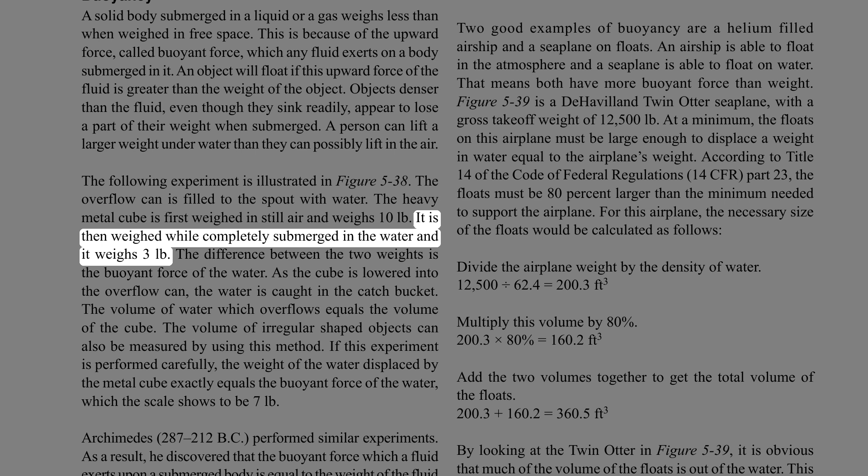The following experiment is illustrated in figure 5-38. The overflow can is filled to the spout with water. The heavy metal cube is first weighed in still air and weighs 10 lb. It is then weighed while completely submerged in the water and it weighs 3 lb. The difference between the two weights is the buoyant force of the water.

As the cube is lowered into the overflow can, the water is caught in the catch bucket. The volume of water which overflows equals the volume of the cube. The volume of irregular-shaped objects can also be measured by using this method.

If this experiment is performed carefully, the weight of the water displaced by the metal cube exactly equals the buoyant force of the water, which the scale shows to be 7 lb.

Archimedes, 287–212 BC, performed similar experiments. As a result, he discovered that the buoyant force which a fluid exerts upon a submerged body is equal to the weight of the fluid the body displaces. This statement is referred to as Archimedes' principle.

This principle applies to all fluids, gases as well as liquids. Just as water exerts a buoyant force on submerged objects, air exerts a buoyant force on objects submerged in it.

The amount of buoyant force available to an object can be calculated by using the following formula: buoyant force equals volume of object times density of fluid displaced. If the buoyant force is more than the object weighs, the object will float. If the buoyant force is less than the object weighs, the object will sink. For the object that sinks, its measurable weight will be less by the weight of the displaced fluid.

Example: a 10 cubic foot object weighing 700 pounds is placed in pure water. Will the object float? If the object sinks, what is its measurable weight in the submerged condition? If the object floats, how many cubic feet of its volume is below the waterline?

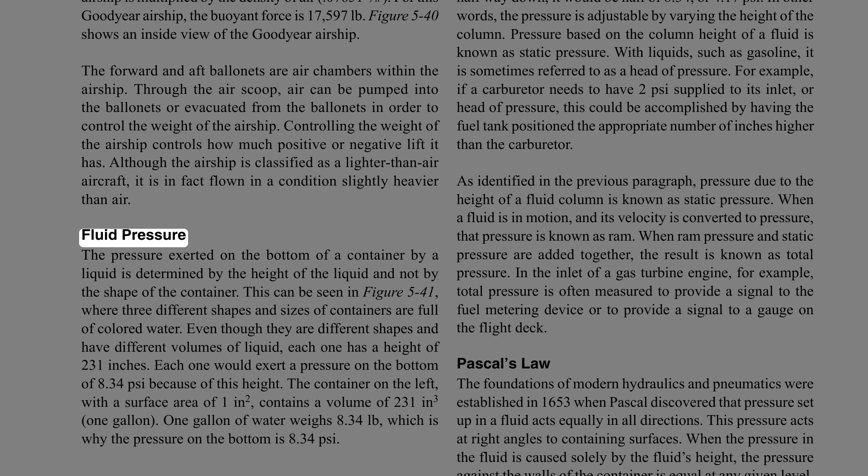Fluid pressure: the pressure exerted on the bottom of a container by a liquid is determined by the height of the liquid and not by the shape of the container. This can be seen in Figure 5-41, where 3 different shapes and sizes of containers are full of colored water. Even though they are different shapes and have different volumes of liquid, each one has a height of 231 inches. Each one would exert a pressure on the bottom of 8.34 psi because of this height.

The container on the left, with a surface area of 1 square inch, contains a volume of 231 cubic inches, or 1 gallon. 1 gallon of water weighs 8.34 pounds, which is why the pressure on the bottom is 8.34 psi. Still thinking about Figure 5-41, if the pressure was measured halfway down, it would be half of 8.34, or 4.17 psi. In other words, the pressure is adjustable by varying the height of the column.

Pressure based on the column height of a fluid is known as static pressure. With liquids such as gasoline, it is sometimes referred to as a head of pressure. For example, if a carburetor needs to have 2 psi supplied to its inlet, or head of pressure, this could be accomplished by having the fuel tank positioned the appropriate number of inches higher than the carburetor.

As identified previously, pressure due to the height of a fluid column is known as static pressure. When a fluid is in motion, and its velocity is converted to pressure, that pressure is known as ram pressure. When ram pressure and static pressure are added together, the result is known as total pressure. In the inlet of a gas turbine engine, for example, total pressure is often measured to provide a signal to the fuel metering device or to a gauge on the flight deck.

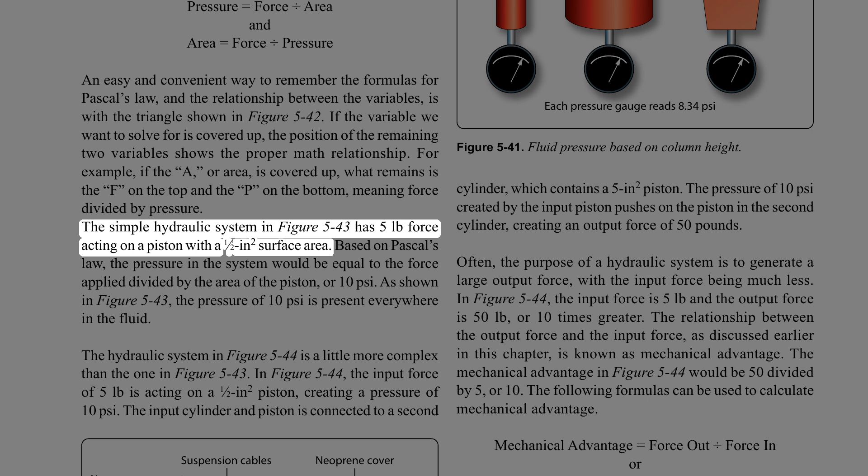The simple hydraulic system in Figure 5-43 has 5 pounds of force acting on a piston with a 1/2 square inch surface area. Based on Pascal's law, the pressure in the system would be equal to the force applied divided by the area of the piston, or 10 psi.

As shown in figure 5-43, the pressure of 10 psi is present everywhere in the fluid.

The hydraulic system in figure 5-44 is a little more complex than the one in figure 5-43. In figure 5-44, an input force of 5 pounds acts on a 1/2 in piston, creating a pressure of 10 psi. The input cylinder and piston is connected to a second cylinder, which contains a 5 in piston. The pressure of 10 psi created by the input piston pushes on the piston in the second cylinder, creating an output force of 50 pounds.

Often, the purpose of a hydraulic system is to generate a large output force, with the input force being much less. In figure 5-44, the input force is 5 pounds and the output force is 50 pounds, or 10 times greater. The relationship between the output force and the input force is known as mechanical advantage. The mechanical advantage in figure 5-44 would be 50 divided by 5, or 10.

The following formulas can be used to calculate mechanical advantage. Mechanical advantage equals force out divided by force in, or mechanical advantage equals distance in divided by distance out.

Earlier in this chapter, when simple machines such as levers and gears were discussed, it was identified that no machine allows us to gain work. The same statement holds true for a hydraulic system: we get no more work out of a hydraulic system than we put in. Since work equals force times distance, if we gain force with a hydraulic system, we must lose distance. We only get the same work out if the system is 100% efficient.

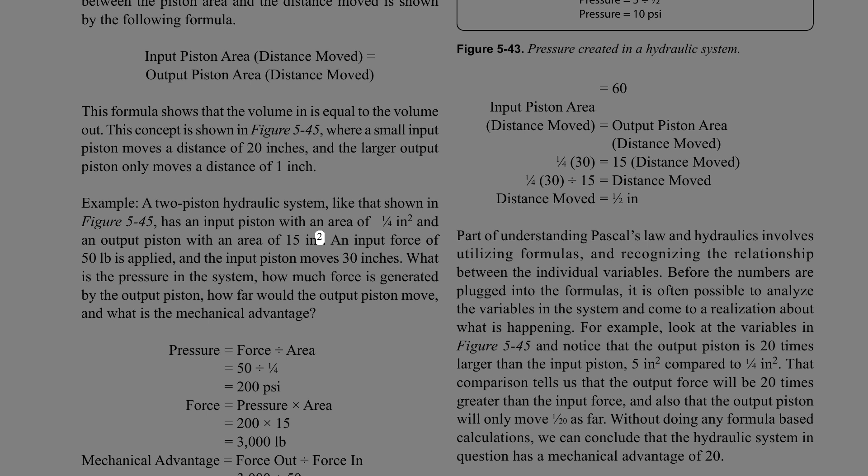Part of understanding Pascal's law and hydraulics involves utilizing formulas and recognizing the relationship between the individual variables. Before the numbers are plugged into the formulas, it is often possible to analyze the variables in the system and come to a realization about what is happening.

For example, look at the variables in figure 5-45 and notice that the output piston is 20 times larger than the input piston. That comparison tells us that the output force will be 20 times greater than the input force, and also that the output piston will only move 1/20th as far. Without doing any formula-based calculations, we can conclude that the hydraulic system in question has a mechanical advantage of 20.

Bernoulli's principle was originally stated to explain the action of a liquid flowing through the varying cross-sectional areas of tubes. In figure 5-46, a tube is shown in which the cross-sectional area gradually decreases to a minimum diameter in its center section.

A tube constructed in this manner is called a venturi, or venturi tube. Where the cross-sectional area is decreasing, the passageway is referred to as a converging duct. As the passageway starts to spread out, it is referred to as a diverging duct. As a liquid or fluid flows through the venturi tube, the gauges at points A, B, and C are positioned to register the velocity and the static pressure of the liquid.

The venturi in Figure 5-46 can be used to illustrate Bernoulli's principle, which states that the static pressure of a fluid, liquid or gas, decreases at points where the velocity of the fluid increases, provided no energy is added to nor taken away from the fluid. The velocity of the air is kinetic energy, and the static pressure of the air is potential energy.

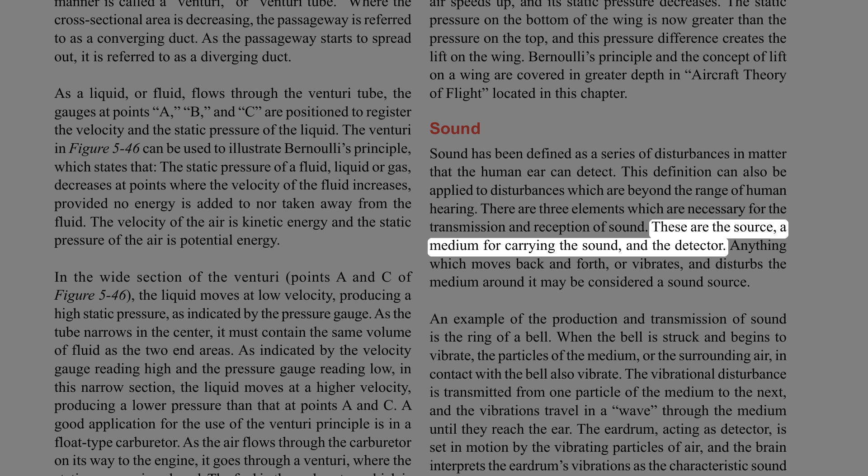Sound has been defined as a series of disturbances in matter that the human ear can detect. This definition can also be applied to disturbances which are beyond the range of human hearing. There are three elements which are necessary for the transmission and reception of sound: these are the source, a medium for carrying the sound, and the detector.

Anything which moves back and forth, or vibrates, and disturbs the medium around it may be considered a sound source. An example of the production and transmission of sound is the ring of a bell. When the bell is struck and begins to vibrate, the particles of the medium, or the surrounding air, in contact with the bell also vibrate.

The vibrational disturbance is transmitted from one particle of the medium to the next, and the vibrations travel in a wave through the medium until they reach the ear. The eardrum, acting as detector, is set in motion by the vibrating particles of air, and the brain interprets the eardrum's vibrations as the characteristic sound associated with a bell.

Wave motion. Since sound is a wave motion in matter, it can best be understood by first considering water waves, like a series of circular waves traveling away from the disturbance of an object thrown into a pool. In Figure 5-47, such waves are seen from a top perspective, with the waves traveling out from the center. In the cross-section perspective in Figure 5-47, notice that the water waves are a succession of crests and troughs.

The wavelength is the distance from the crest of one wave to the crest of the next. Water waves are known as transverse waves because the motion of the water molecules is up and down, or at right angles to the direction in which the waves are traveling. This can be seen by observing a cork on the water, bobbing up and down as the waves pass by.

Sound travels through matter in the form of longitudinal wave motions. These waves are called longitudinal waves because the particles of the medium vibrate back and forth longitudinally in the direction of propagation. When the tine of a tuning fork moves in an outward direction, the air immediately in front of the tine is compressed so that its momentary pressure is raised above that at other points in the surrounding medium.

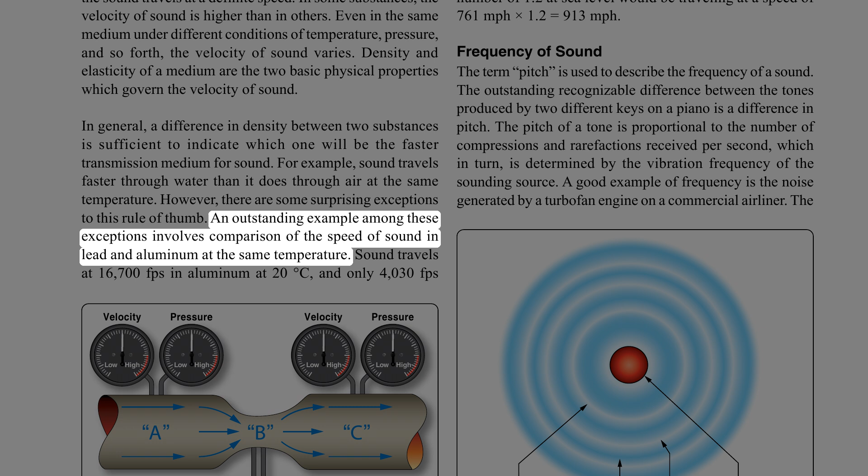An outstanding example among these exceptions involves comparison of the speed of sound in lead and aluminum at the same temperature. Sound travels at 16,700 fps in aluminum at 20 degrees Celsius, and only 4,030 fps in lead at 20 degrees Celsius, despite the fact that lead is much denser than aluminum. The reason for such exceptions is found in the fact that sound velocity depends on elasticity as well as density. Using density as a rough indication of the speed of sound in a given substance, it can be stated as a general rule that sound travels fastest in solid materials, slower in liquids, and slowest in gases.

The velocity of sound in air at 0 degrees Celsius, 32 degrees Fahrenheit, is 1087 fps and increases by 2 fps for each centigrade degree of temperature rise, or 1.1 fps for each degree Fahrenheit.

Mach number. In the study of aircraft that fly at supersonic speeds, it is customary to discuss aircraft speed in relation to the velocity of sound, which is approximately 761 miles per hour at 59 degrees Fahrenheit. The term Mach number has been given to the ratio of the speed of an aircraft to the speed of sound, in honor of Ernst Mach, an Austrian scientist. If the speed of sound at sea level is 761 miles per hour, an aircraft flying at a Mach number of 1.2 at sea level would be traveling at a speed of 761 miles per hour times 1.2 equals 913 miles per hour.

Frequency of sound. The term pitch is used to describe the frequency of a sound. The outstanding recognizable difference between the tones produced by two different keys on a piano is a difference in pitch. The pitch of a tone is proportional to the number of compressions and rarefactions received per second, which in turn is determined by the vibration frequency of the sounding source. A good example of frequency is the noise generated by a turbofan engine on a commercial airliner. The high tip speeds of the fan in the front of the engine create a high-frequency sound, and the hot exhaust creates a low-frequency sound.

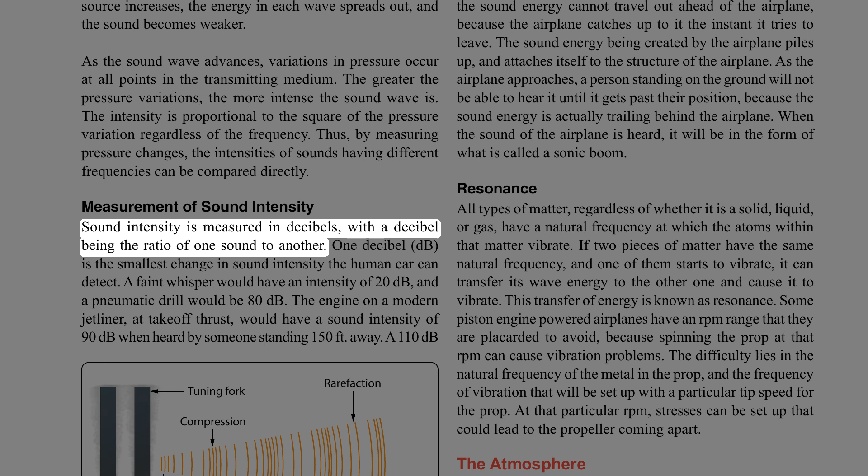Measurement of sound intensity. Sound intensity is measured in decibels, with a decibel being the ratio of one sound to another. 1 decibel, dB, is the smallest change in sound intensity the human ear can detect. A faint whisper would have an intensity of 20 decibels, and a pneumatic drill would be 80 decibels. The engine on a modern jetliner, at takeoff thrust, would have a sound intensity of 90 decibels when heard by someone standing 150 feet away.

A 110 decibel noise, by comparison, would sound twice as loud as a jetliner's engine. Figure 5-49 shows the sound intensity from a variety of different sources.

The Doppler effect: when sound is coming from a moving object, the object's forward motion adds to the frequency as sensed from the front and takes away from the frequency as sensed from the rear. This change in frequency is known as the Doppler effect, and it explains why the sound from an airplane seems different as it approaches compared to how it sounds as it flies overhead.

As it approaches, it becomes both louder and higher pitched. As it flies away, the loudness and pitch both decrease noticeably.

If an airplane is flying at or higher than the speed of sound, the sound energy cannot travel out ahead of the airplane, because the airplane catches up to it the instant it tries to leave. The sound energy being created by the airplane piles up and attaches itself to the structure of the airplane.

As the airplane approaches, a person standing on the ground will not be able to hear it until it gets past their position, because the sound energy is actually trailing behind the airplane. When the sound of the airplane is heard, it will be in the form of what is called a sonic boom.

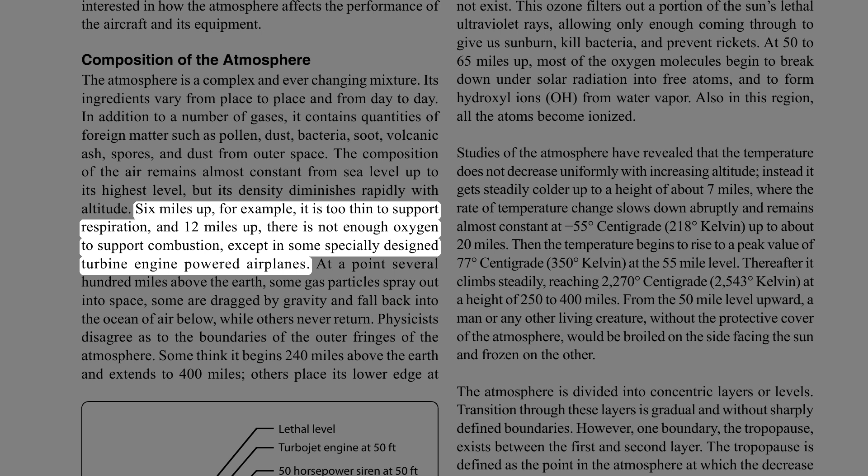At a point several hundred miles above the Earth, some gas particles spray out into space, some are dragged by gravity and fall back into the ocean of air below, while others never return. Physicists disagree as to the boundaries of the outer fringes of the atmosphere. Some think it begins 240 miles above the Earth and extends to 400 miles. Others place its lower edge at 600 miles and its upper boundary at 6,000 miles. There are also certain nonconformities at various levels.

Between 12 and 30 miles, high solar ultraviolet radiation reacts with oxygen molecules to produce a thin curtain of ozone, a very poisonous gas without which life on Earth could not exist. This ozone filters out a portion of the sun's lethal ultraviolet rays, allowing only enough through to give us sunburn, kill bacteria, and prevent rickets.

At 50 to 65 miles up, most of the oxygen molecules begin to break down under solar radiation into free atoms, and to form hydroxyl ions from water vapor. Also in this region, all the atoms become ionized.

Studies of the atmosphere have revealed that temperature does not decrease uniformly with increasing altitude. Instead, it gets steadily colder up to about 7 miles, where the rate of change slows abruptly and remains almost constant at minus 55 degrees centigrade, 218 degrees Kelvin, up to about 20 miles. Then the temperature begins to rise to a peak of 77 degrees centigrade, 350 degrees Kelvin, at the 55-mile level.

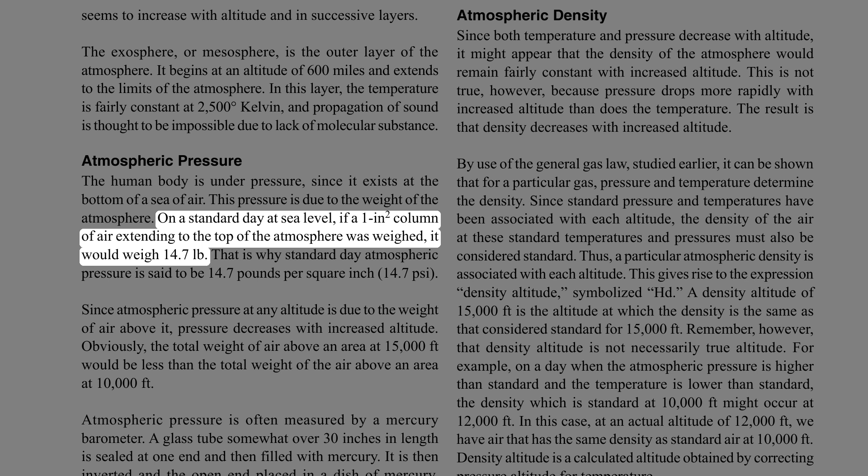Atmospheric pressure: the human body is under pressure, since it exists at the bottom of a sea of air. This pressure is due to the weight of the atmosphere. On a standard day at sea level, a 1 square inch column of air extending to the top of the atmosphere would weigh 14.7 pounds. That is why standard day atmospheric pressure is said to be 14.7 pounds per square inch, 14.7 psi.

Since atmospheric pressure at any altitude is due to the weight of air above it, pressure decreases with increased altitude. Obviously, the total weight of air above an area at 15,000 feet would be less than the total weight of air above an area at 10,000 feet.

Atmospheric pressure is often measured by a mercury barometer. A glass tube somewhat over 30 inches in length is sealed at one end and filled with mercury. It is then inverted and the open end placed in a dish of mercury. Immediately, the mercury level in the inverted tube will drop a short distance, leaving a small volume of mercury vapor at nearly zero absolute pressure in the tube just above the top of the liquid mercury column.

Gravity acting on the mercury in the tube will try to make the mercury run out. Atmospheric pressure pushing down on the mercury in the open container tries to make the mercury stay in the tube. At some point, these two forces, gravity and atmospheric pressure, equilibrate, and the mercury stabilizes at a certain height in the tube.

Under standard day atmospheric conditions, the air in a 1 square inch column extending to the top of the atmosphere would weigh 14.7 pounds. A 1 square inch column of mercury, 29.92 inches tall, would also weigh 14.7 pounds. That is why 14.7 psi is equal to 29.92 inches of mercury. Figure 5-50 demonstrates this point.

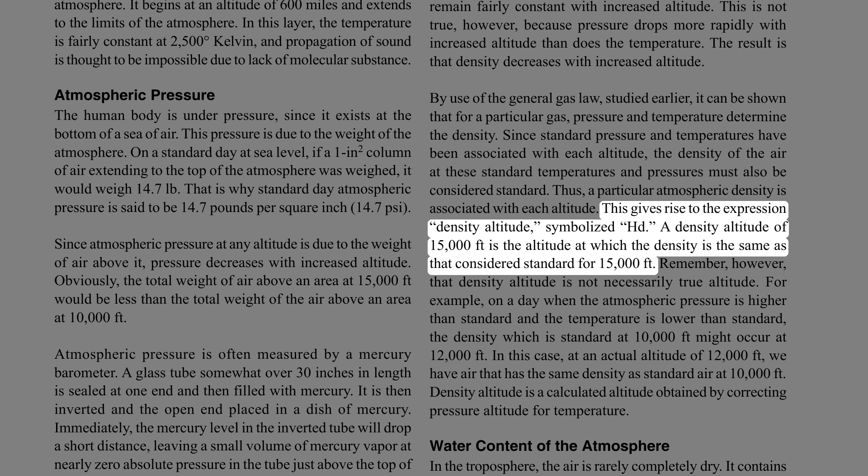A density altitude of 15,000 feet is the altitude at which the density is the same as that considered standard for 15,000 feet. Remember, however, that density altitude is not necessarily true altitude. For example, on a day when the atmospheric pressure is higher than standard and the temperature is lower than standard, the density which is standard at 10,000 feet might occur at 12,000 feet. In this case, at an actual altitude of 12,000 feet, we have air that has the same density as standard air at 10,000 feet. Density altitude is a calculated altitude obtained by correcting pressure altitude for temperature.

Water content of the atmosphere. In the troposphere, the air is rarely completely dry. It contains water vapor in one of two forms: fog, or water vapor. Fog consists of minute droplets of water held in suspension by the air. Clouds are composed of fog. The height to which some clouds extend is a good indication of the presence of water in the atmosphere, almost up to the stratosphere.

As a result of evaporation, the atmosphere always contains some moisture in the form of water vapor. The moisture in the air is called the humidity of the air. Moisture does not consist of tiny particles of liquid held in suspension in the air as in the case of fog, but is an invisible vapor, truly as gaseous as the air with which it mixes. Fog and humidity both affect the performance of an aircraft.

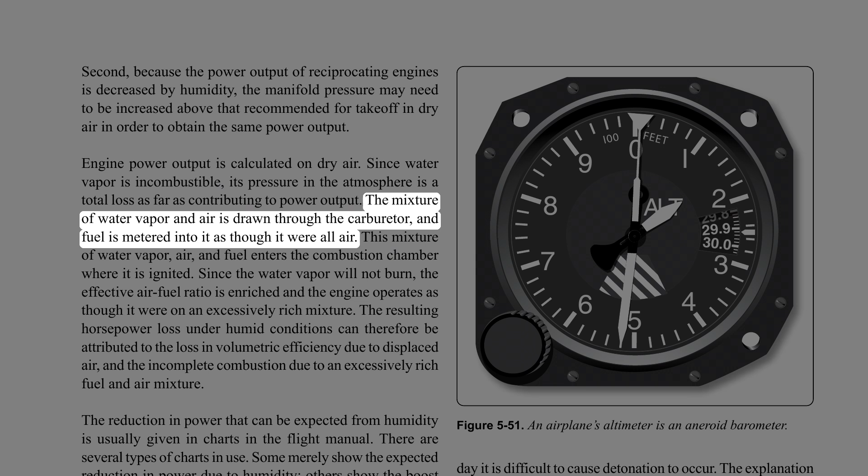Engine power output is calculated on dry air. Since water vapor is incombustible, its pressure in the atmosphere is a total loss as far as contributing to power output. The mixture of water vapor and air is drawn through the carburetor, and fuel is metered into it as though it were all air. This mixture of water vapor, air, and fuel enters the combustion chamber where it is ignited. Since the water vapor will not burn, the effective air-fuel ratio is enriched and the engine operates as though it were on an excessively rich mixture.

The resulting horsepower loss under humid conditions can therefore be attributed to the loss in volumetric efficiency due to displaced air, and the incomplete combustion due to an excessively rich fuel and air mixture. The reduction in power that can be expected from humidity is usually given in charts in the flight manual. There are several types of charts in use. Some merely show the expected reduction in power due to humidity. Others show the boost in manifold pressure necessary to restore full takeoff power. The effect of fog on the performance of an engine is very noticeable, particularly on engines with high compression ratios.

Normally, some detonation will occur during acceleration, due to the high BMEP (brake mean effective pressures) developed. However, on a foggy day it is difficult to cause detonation to occur. This is because fog consists of particles of water that have not vaporized. When these particles enter the cylinders, they absorb a tremendous amount of heat energy in the process of vaporizing. The temperature is thus lowered, and the decrease is sufficient to prevent detonation. Fog will generally cause a decrease in horsepower output. However, with a supercharged engine, it will be possible to use higher manifold pressures without danger of detonation.

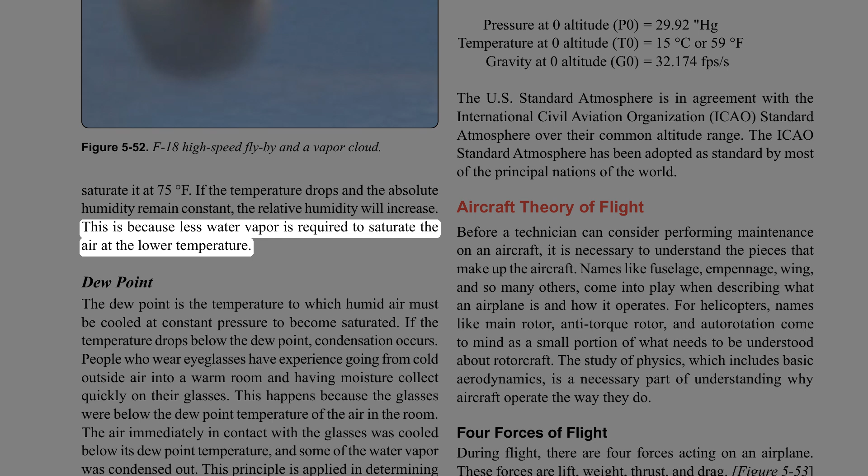Suppose, for example, that a weather report includes the information that the temperature is 75 degrees Fahrenheit and the relative humidity is 56%. This indicates that the air holds 56% of the water vapor required to saturate it at 75 degrees Fahrenheit. If the temperature drops and the absolute humidity remains constant, the relative humidity will increase. This is because less water vapor is required to saturate the air at the lower temperature.

The dew point is the temperature to which humid air must be cooled at constant pressure to become saturated. If the temperature drops below the dew point, condensation occurs. People who wear eyeglasses have experienced going from cold outside air into a warm room and having moisture collect quickly on their glasses. This happens because the glasses were below the dew point temperature of the air in the room.

The air immediately in contact with the glasses was cooled below its dew point temperature, and some of the water vapor was condensed out. This principle is applied in determining the dew point. A vessel is cooled until water vapor begins to condense on its surface. The temperature at which this occurs is the dew point.

Vapor pressure is the portion of atmospheric pressure that is exerted by the moisture in the air, which is expressed in tenths of an inch of mercury. The dew point for a given condition depends on the amount of vapor pressure present. Thus, a direct relationship exists between the vapor pressure and the dew point.

If the performance of an aircraft is computed, either through flight tests or wind tunnel tests, some standard reference condition must be determined first in order to compare results with those of similar tests. The conditions in the atmosphere vary continuously, and it is generally not possible to obtain exactly the same set of conditions on 2 different days or even on 2 successive flights. For this reason, a set group of standards must be used as a point of reference.

The set of standard conditions presently used in the United States is known as the U.S. Standard Atmosphere. The standard atmosphere approximates the average conditions existing at 40 degrees latitude and is determined on the basis of certain assumptions, with defined standard sea level conditions. The U.S. Standard Atmosphere is in agreement with the International Civil Aviation Organization (ICAO) standard atmosphere over their common altitude range. The ICAO standard atmosphere has been adopted as standard by most of the principal nations of the world.

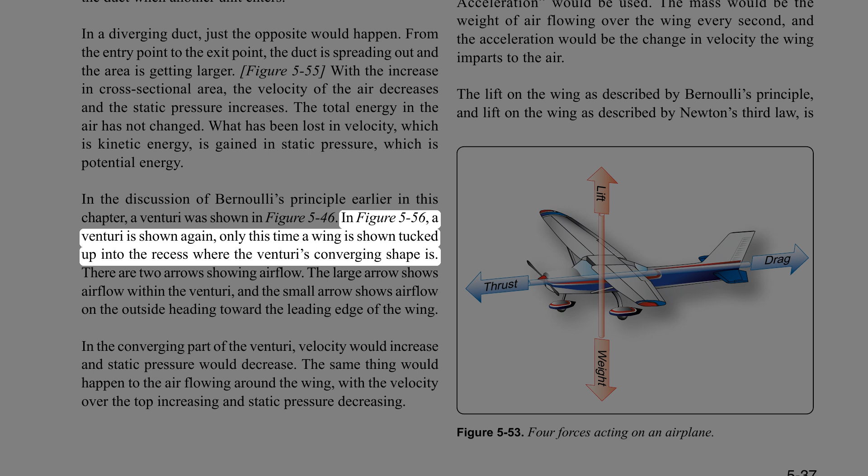In the discussion of Bernoulli's principle earlier in this chapter, a venturi was shown in figure 5-46. In figure 5-56, a venturi is shown again, only this time a wing is shown tucked up into the recess where the venturi's converging shape is. There are two arrows showing airflow. The large arrow shows airflow within the venturi, and the small arrow shows airflow on the outside heading toward the leading edge of the wing.

In the converging part of the venturi, velocity would increase and static pressure would decrease. The same thing would happen to the air flowing around the wing, with the velocity over the top increasing and static pressure decreasing. In Figure 5-56, the air reaching the leading edge of the wing separates into two separate flows. Some of the air goes over the top of the wing and some travels along the bottom. The air going over the top, because of the curvature, has farther to travel.

With a greater distance to travel, the air going over the top must move at a greater velocity. The higher velocity on the top causes the static pressure on the top to be less than it is on the bottom, and this difference in static pressures is what creates lift.

For the wing shown in Figure 5-56, imagine it is 5 feet wide, 15 feet long, for a surface area of 75 square feet. If the difference in static pressure between the top and bottom is 0.1 psi, there will be 1/10 of a pound of lift for each square inch of surface area. Since there are 10,800 square inches of surface area, there would be 1,080 pounds of lift, 0.1 times 10,800 square inches. Lift and Newton's third law.

Newton's third law identifies that for every force there is an equal and opposite reacting force. In addition to Bernoulli's principle, Newton's third law can also be used to explain the lift being created by a wing. As the air travels around a wing and leaves the trailing edge, the air is forced to move in a downward direction. Since a force is required to make something change direction, there must be an equal and opposite reacting force. In this case, the reacting force is what we call lift. In order to calculate lift based on Newton's third law, Newton's second law and the formula, force equals mass times acceleration, would be used.

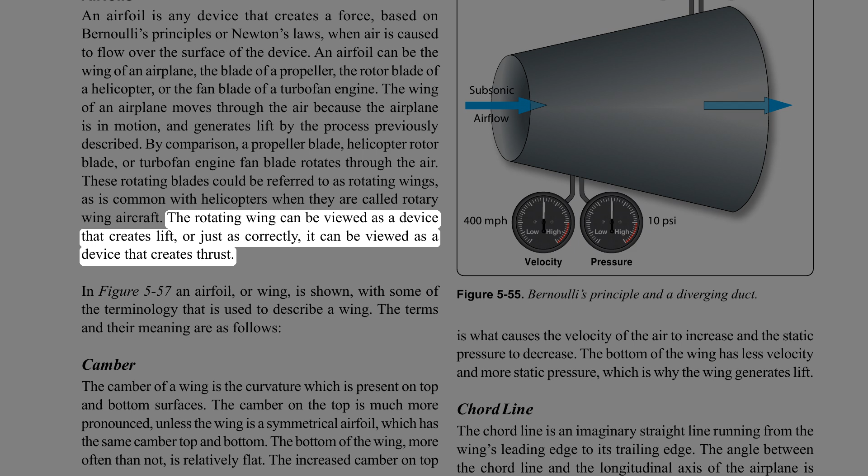In Figure 5-57, an airfoil, or wing, is shown, with some of the terminology that is used to describe a wing. The terms and their meaning are as follows.

Camber. The camber of a wing is the curvature which is present on top and bottom surfaces. The camber on the top is much more pronounced, unless the wing is a symmetrical airfoil, which has the same camber top and bottom. The bottom of the wing, more often than not, is relatively flat. The increased camber on top is what causes the velocity of the air to increase and the static pressure to decrease. The bottom of the wing has less velocity and more static pressure, which is why the wing generates lift.

Chord line. The chord line is an imaginary straight line running from the wing's leading edge to its trailing edge. The angle between the chord line and the longitudinal axis of the airplane is known as the angle of incidence.

Relative wind. The relative wind is a relationship between the direction of airflow and the aircraft wing. In normal flight circumstances, the relative wind is the opposite direction of the aircraft flight path. If the flight path is forward, then the relative wind is backward. If the flight path is forward and upward, then the relative wind is backward and downward. If the flight path is forward and downward, then the relative wind is backward and upward. Therefore, the relative wind is parallel to the flight path, and travels in the opposite direction.

Angle of attack. The angle between the chord line and the relative wind is the angle of attack. As the angle of attack increases, the lift on the wing increases. If the angle of attack becomes too great, the airflow can separate from the wing and the lift will be destroyed. When this occurs, a condition known as a stall takes place. There are a number of different shapes, known as planforms, that a wing can have.

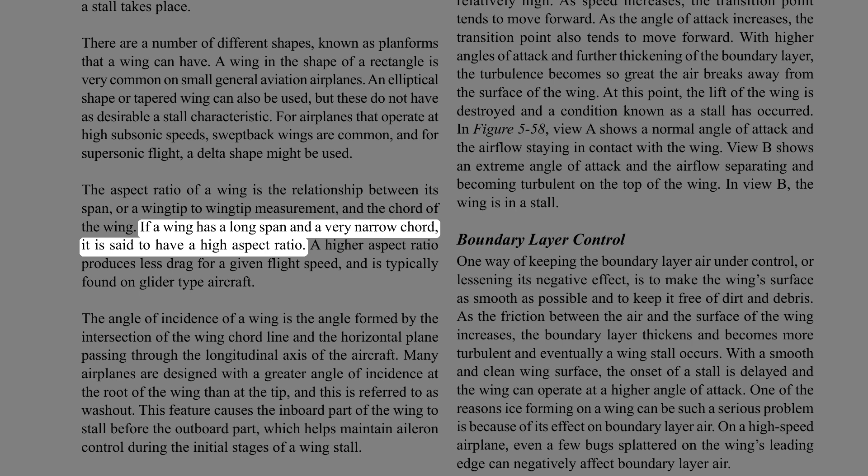If a wing has a long span and a very narrow chord, it is said to have a high aspect ratio. A higher aspect ratio produces less drag for a given flight speed, and is typically found on glider-type aircraft.

The angle of incidence of a wing is the angle formed by the intersection of the wing chord line and the horizontal plane passing through the longitudinal axis of the aircraft. Many airplanes are designed with a greater angle of incidence at the root of the wing than at the tip, and this is referred to as washout. This feature causes the inboard part of the wing to stall before the outboard part, which helps maintain aileron control during the initial stages of a wing stall.

Boundary layer airflow. The boundary layer is a very thin layer of air lying over the surface of the wing and, for that matter, all other surfaces of the airplane.

Because air has viscosity, this layer of air tends to adhere to the wing. As the wing moves forward through the air, the boundary layer at first flows smoothly over the streamlined shape of the airfoil. Here the flow is called the laminar layer.

As the boundary layer approaches the center of the wing, it begins to lose speed due to skin friction and becomes thicker and turbulent. Here it is called the turbulent layer. The point at which the boundary layer changes from laminar to turbulent is called the transition point.

Where the boundary layer becomes turbulent, drag due to skin friction is relatively high. As speed increases, the transition point tends to move forward. As the angle of attack increases, the transition point also tends to move forward.

With higher angles of attack and further thickening of the boundary layer, the turbulence becomes so great the air breaks away from the surface of the wing. At this point, the lift of the wing is destroyed and a condition known as a stall has occurred.

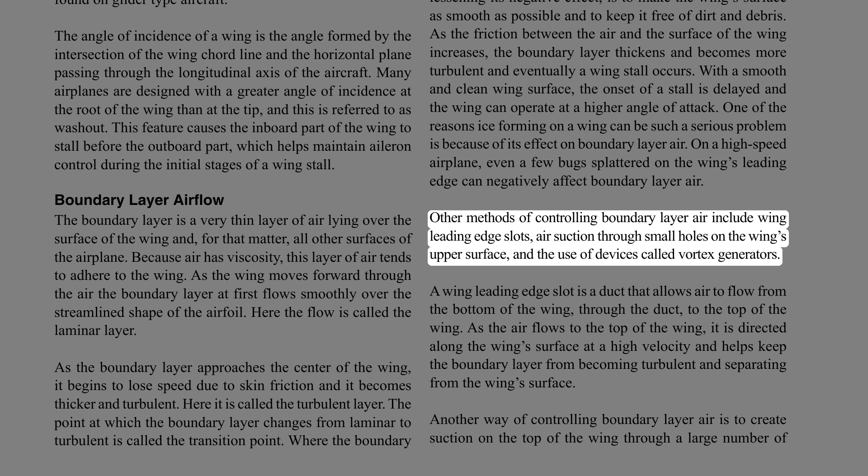One of the reasons ice forming on a wing can be such a serious problem is because of its effect on boundary layer air. On a high-speed airplane, even a few bugs splattered on the wing's leading edge can negatively affect boundary layer air. Other methods of controlling boundary layer air include wing leading edge slots, air suction through small holes on the wing's upper surface, and the use of devices called vortex generators.

A wing leading edge slot is a duct that allows air to flow from the bottom of the wing, through the duct, to the top of the wing. As the air flows to the top of the wing, it is directed along the wing's surface at a high velocity and helps keep the boundary layer from becoming turbulent and separating from the wing's surface.

Another way of controlling boundary layer air is to create suction on the top of the wing through a large number of small holes. The suction on the top of the wing draws away the slow-moving turbulent air and helps keep the remainder of the airflow in contact with the wing.

Vortex generators are used on airplanes that fly at high subsonic speed, where the velocity of the air on the top of the wing can reach Mach 1. As the air reaches Mach 1 velocity, a shock wave forms on the top of the wing, and the subsequent shock wave causes the air to separate from the wing's upper surface.

Vortex generators are short airfoils, arranged in pairs, located on the wing's upper surface. They are positioned such that they pull high-energy air down into the boundary layer region and prevent airflow separation.

Wingtip vortices. Wingtip vortices are caused by the air beneath the wing, which is at the higher pressure, flowing over the wingtip and up toward the top of the wing. The end result is a spiral or vortex that trails behind the wingtip anytime lift is being produced.

This vortex is also referred to as wake turbulence, and is a significant factor in determining how closely one airplane can follow behind another on approach to land. The wake turbulence of a large airplane can cause a smaller airplane, if it is following too closely, to be thrown out of control. Vortices from the wing and from the horizontal stabilizer are quite visible on the MD-11 shown in Figure 5-59.

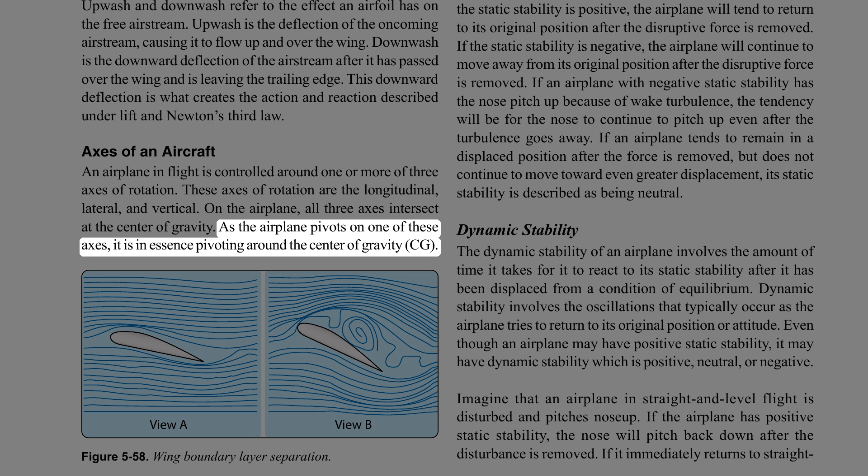Axes of an aircraft. An airplane in flight is controlled around one or more of three axes of rotation. These axes are the longitudinal, lateral, and vertical. On the airplane, all three axes intersect at the center of gravity. As the airplane pivots on one of these axes, it is in essence pivoting around the center of gravity, CG, which is also referred to as the center of rotation.

On the brightly colored airplane shown in Figure 5-60, the three axes are shown in the colors red, vertical axis, blue, longitudinal axis, and orange, lateral axis. The flight control that makes the airplane move around each axis is shown in a matching color.

The rudder, in red, causes the airplane to move around the vertical axis, and this movement is described as being a yaw. The elevator, in orange, causes the airplane to move around the lateral axis, and this movement is described as being a pitch. The ailerons, in blue, cause the airplane to move around the longitudinal axis, and this movement is described as being a roll.

Aircraft stability. When an airplane is in straight and level flight at a constant velocity, all the forces acting on the airplane are in equilibrium. If that straight and level flight is disrupted by a disturbance in the air, such as wake turbulence, the airplane might pitch up or down, yaw left or right, or go into a roll.

If the airplane has what is characterized as stability, once the disturbance goes away, the airplane will return to a state of equilibrium. Static stability.

The initial response that an airplane displays after its equilibrium is disrupted is referred to as its static stability. If the static stability is positive, the airplane will tend to return to its original position after the disruptive force is removed. If the static stability is negative, the airplane will continue to move away from its original position after the disruptive force is removed.

If an airplane with negative static stability has the nose pitch up because of wake turbulence, the tendency will be for the nose to continue to pitch up even after the turbulence goes away. If an airplane tends to remain in a displaced position after the force is removed, but does not continue to move toward even greater displacement, its static stability is described as being neutral.

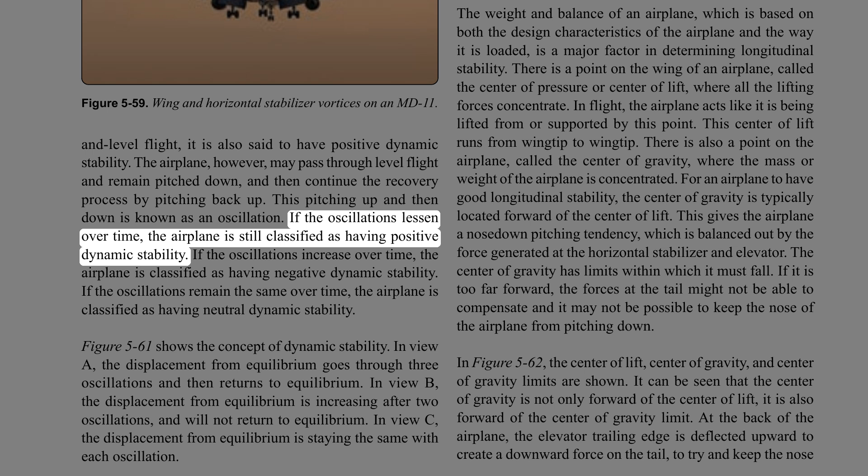If the oscillations lessen over time, the airplane is still classified as having positive dynamic stability. If the oscillations increase over time, the airplane is classified as having negative dynamic stability. If the oscillations remain the same over time, the airplane is classified as having neutral dynamic stability.

Figure 5-61 shows the concept of dynamic stability. In View A, the displacement from equilibrium goes through three oscillations and then returns to equilibrium. In View B, the displacement from equilibrium is increasing after two oscillations, and will not return to equilibrium. In View C, the displacement from equilibrium is staying the same with each oscillation.

Longitudinal stability. Longitudinal stability for an airplane involves the tendency for the nose to pitch up or pitch down, rotating around the lateral axis, which is measured from wingtip to wingtip. If an airplane is longitudinally stable, it will return to a properly trimmed angle of attack after the force that upset its flight path is removed.

The weight and balance of an airplane, which is based on both the design characteristics of the airplane and the way it is loaded, is a major factor in determining longitudinal stability. There is a point on the wing of an airplane, called the center of pressure or center of lift, where all the lifting forces concentrate. In flight, the airplane acts like it is being lifted from or supported by this point. This center of lift runs from wingtip to wingtip. There is also a point on the airplane, called the center of gravity, where the mass or weight of the airplane is concentrated.

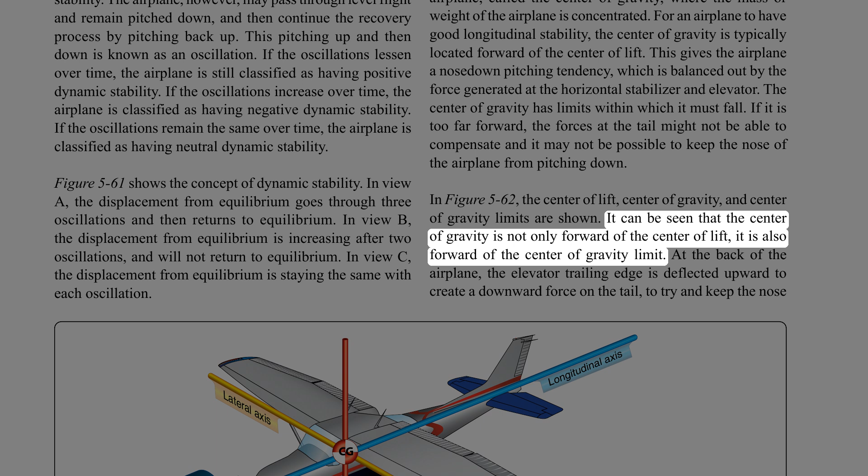In Figure 5-62, the center of lift, center of gravity, and center of gravity limits are shown. It can be seen that the center of gravity is not only forward of the center of lift, it is also forward of the center of gravity limit. At the back of the airplane, the elevator trailing edge is deflected upward to create a downward force on the tail, to try and keep the nose of the airplane up.

This airplane would be highly unstable longitudinally, especially at low speed when trying to land. It is especially dangerous if the center of gravity is behind the aft limit. The airplane will now have a tendency to pitch nose up, which can lead to the wing stalling and possible loss of control of the airplane.

Lateral stability. Lateral stability of an airplane takes place around the longitudinal axis, which is from the airplane's nose to its tail. If one wing is lower than the other, good lateral stability will tend to bring the wings back to a level flight attitude.

One design characteristic that tends to give an airplane good lateral stability is called dihedral. Dihedral is an upward wing angle, with respect to the horizontal, and it is usually just a few degrees.

Imagine a low-wing airplane with a few degrees of dihedral experiencing a disruption of its flight path such that the left wing drops. When the left wing drops, this will cause the airplane to experience a sideslip toward the low wing. The sideslip causes the low wing to experience a higher angle of attack, which increases its lift and raises it back to a level flight attitude. The dihedral on a wing is shown in Figure 5-63.

Directional stability: movement of the airplane around its vertical axis, and the airplane's ability to not be adversely affected by a force creating a yaw type of motion, is called directional stability. The vertical fin gives the airplane this stability, causing the airplane to align with the relative wind.

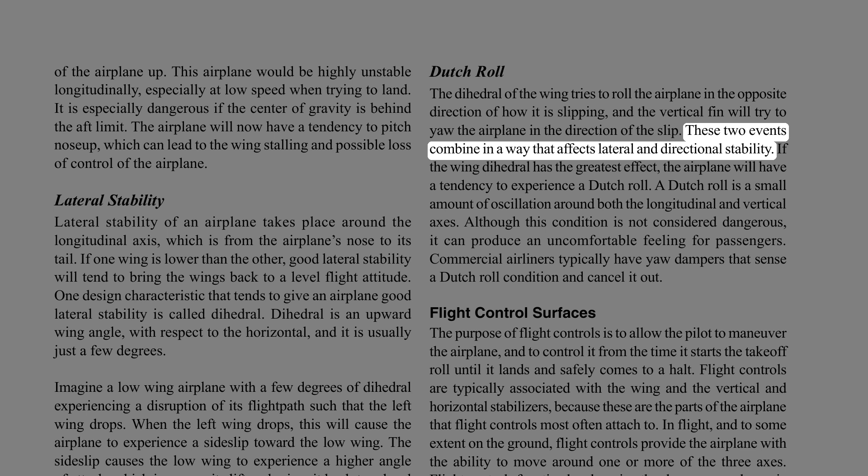Dutch roll. The dihedral of the wing tries to roll the airplane in the opposite direction of how it is slipping, and the vertical fin will try to yaw the airplane in the direction of the slip. These two events combine in a way that affects lateral and directional stability. If the wing dihedral has the greatest effect, the airplane will have a tendency to experience a Dutch roll. A Dutch roll is a small amount of oscillation around both the longitudinal and vertical axes. Although this condition is not considered dangerous, it can produce an uncomfortable feeling for passengers.

Commercial airliners typically have yaw dampers that sense a Dutch roll condition and cancel it out.

Flight control surfaces. The purpose of flight controls is to allow the pilot to maneuver the airplane, and to control it from the time it starts the takeoff roll until it lands and safely comes to a halt. Flight controls are typically associated with the wing and the vertical and horizontal stabilizers, because these are the parts of the airplane that flight controls most often attach to.

In flight, and to some extent on the ground, flight controls provide the airplane with the ability to move around one or more of the three axes. Flight controls function by changing the shape or aerodynamic characteristics of the surface they are attached to.

Flight controls and the lateral axis. The lateral axis of an airplane is a line that runs through the wing, from wingtip to wingtip, passing through the airplane's center of gravity. Movement around this axis is called pitch, and control around this axis is called longitudinal control.

The flight control that handles this job is the elevator attached to the horizontal stabilizer, a fully moving horizontal stabilizer, or on a V-tail configured airplane, it is called ruddervators. An elevator on a Cessna 182 can be seen in Figure 5-65. In Figure 5-66, a fully moving horizontal stabilizer, known as a stabilator, can be seen on a Piper Cherokee Cruiser PA-28-140, and Figure 5-67 shows a ruddervator on a Beechcraft Bonanza.

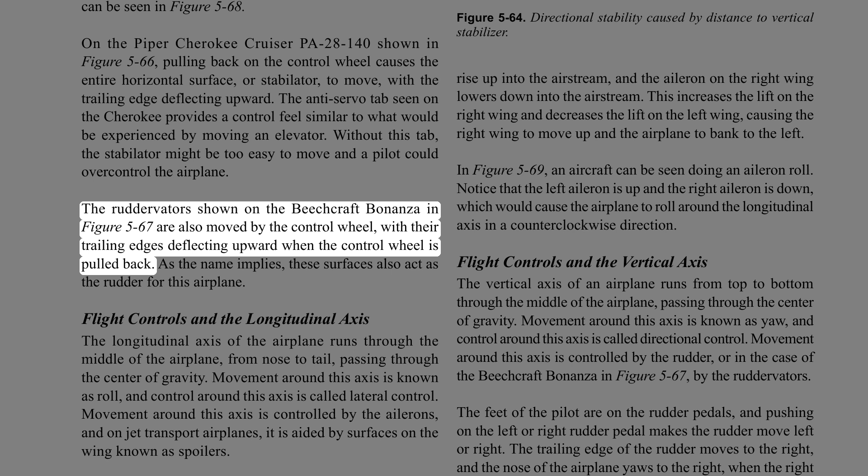The ruddervators shown on the Beechcraft Bonanza in Figure 5-67 are also moved by the control wheel, with their trailing edges deflecting upward when the control wheel is pulled back. As the name implies, these surfaces also act as the rudder for this airplane.

Flight controls and the longitudinal axis. The longitudinal axis of the airplane runs through the middle of the airplane, from nose to tail, passing through the center of gravity. Movement around this axis is known as roll, and control around this axis is called lateral control.

Movement around this axis is controlled by the ailerons, and on jet transport airplanes, it is aided by surfaces on the wing known as spoilers. The ailerons move as a result of the pilot rotating the control wheel to the left or to the right, much the same as turning the steering wheel on an automobile.

When a pilot turns the control wheel to the left, the airplane is being asked to turn or bank to the left. Turning the control wheel to the left causes the trailing edge of the aileron on the left wing to rise up into the airstream, and the aileron on the right wing lowers down into the airstream. This increases the lift on the right wing and decreases the lift on the left wing, causing the right wing to move up, making the airplane bank to the left.

In Figure 5-69, an aircraft can be seen doing an aileron roll. Notice that the left aileron is up and the right aileron is down, which would cause the airplane to roll around the longitudinal axis in a counterclockwise direction.

Flight controls and the vertical axis. The vertical axis of an airplane runs from top to bottom through the middle of the airplane, passing through the center of gravity. Movement around this axis is known as yaw, and control around this axis is called directional control.

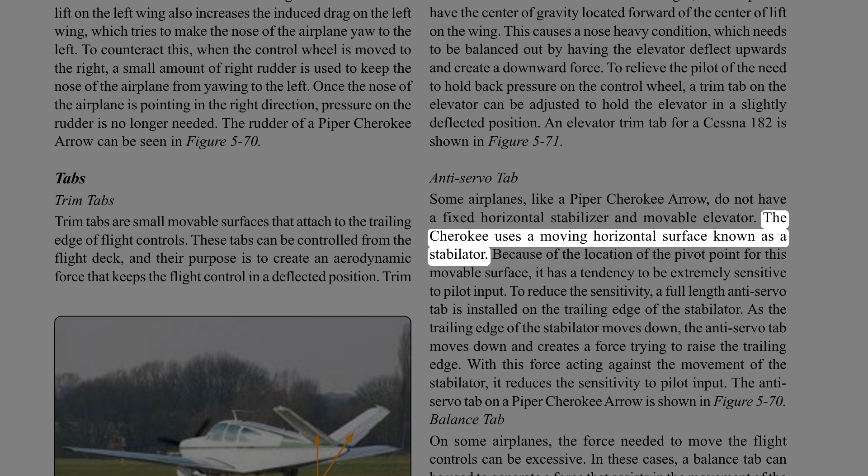Some airplanes, like a Piper Cherokee Arrow, do not have a fixed horizontal stabilizer and movable elevator. The Cherokee uses a moving horizontal surface known as a stabilator. Because of the location of the pivot point for this movable surface, it has a tendency to be extremely sensitive to pilot input. To reduce the sensitivity, a full-length anti-servo tab is installed on the trailing edge of the stabilator.

As the trailing edge of the stabilator moves down, the anti-servo tab moves down and creates a force trying to raise the trailing edge. With this force acting against the movement of the stabilator, it reduces the sensitivity to pilot input. The anti-servo tab on a Piper Cherokee Arrow is shown in Figure 5-70.

On some airplanes, the force needed to move the flight controls can be excessive. In these cases, a balance tab can be used to generate a force that assists in the movement of the flight control. Just the opposite of anti-servo tabs, balance tabs move in the opposite direction of the flight control's trailing edge, providing a force that helps the flight control move.

On large airplanes, because the force needed to move the flight controls is beyond the capability of the pilot, hydraulic actuators are used to provide the necessary force. In the event of a hydraulic system malfunction or failure, some of these airplanes have servo tabs on the trailing edge of the primary flight controls.

When the control wheel is pulled back in an attempt to move the elevator, the servo tab moves and creates enough aerodynamic force to move the elevator. The servo tab is acting like a balance tab, but rather than assisting the normal force that moves the elevator, it becomes the sole force that makes the elevator move. Like the balance tab, the servo tab moves in the opposite direction of the flight control's trailing edge.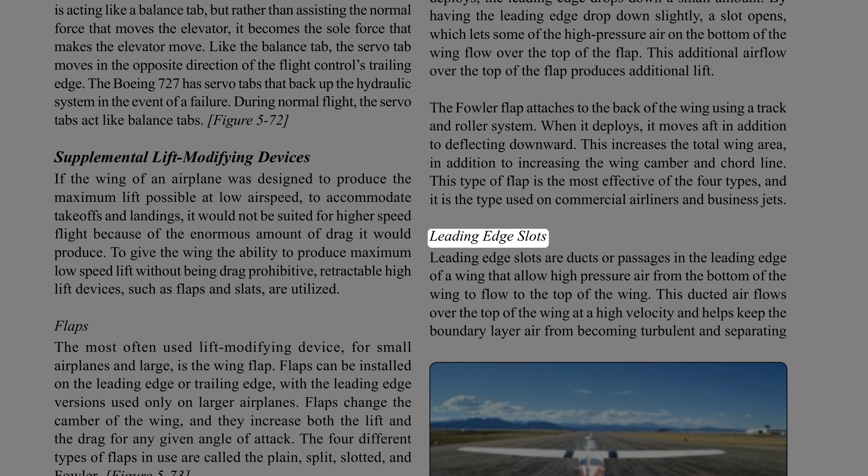Leading edge slots. Leading edge slots are ducts or passages in the leading edge of a wing that allow high-pressure air from the bottom of the wing to flow to the top of the wing. This ducted air flows over the top of the wing at a high velocity and helps keep the boundary layer air from becoming turbulent and separating from the wing.

Slots are often placed on the part of the wing ahead of the ailerons, so during a wing stall, the inboard part of the wing stalls first and the ailerons remain effective.

Leading edge slats. Leading edge slats serve the same purpose as slots, the difference being that slats are movable and can be retracted when not needed. On some airplanes, leading edge slats have been automatic in operation, deploying in response to the aerodynamic forces that come into play during a high angle of attack. On most of today's commercial airliners, the leading edge slats deploy when the trailing edge flaps are lowered.

The flight controls of a large commercial airliner are shown in figure 5-74. The controls by color are as follows: all aerodynamic tabs are shown in green; all leading and trailing edge high lift devices are shown in red (leading edge flaps and slats, trailing edge inboard and outboard flaps); the tail-mounted primary flight controls are in orange (rudder and elevator); the wing-mounted primary flight controls are in purple (inboard and outboard aileron). High-speed aerodynamics compressibility effects: when air is flowing at subsonic speed, it acts like an incompressible fluid.

As discussed earlier in this chapter, when air at subsonic speed flows through a diverging shaped passage, the velocity decreases and the static pressure rises, but the density of the air does not change. In a converging shaped passage, subsonic air speeds up and its static pressure decreases. When supersonic air flows through a converging passage, its velocity decreases and its pressure and density both increase. At supersonic flow, air acts like a compressible fluid.

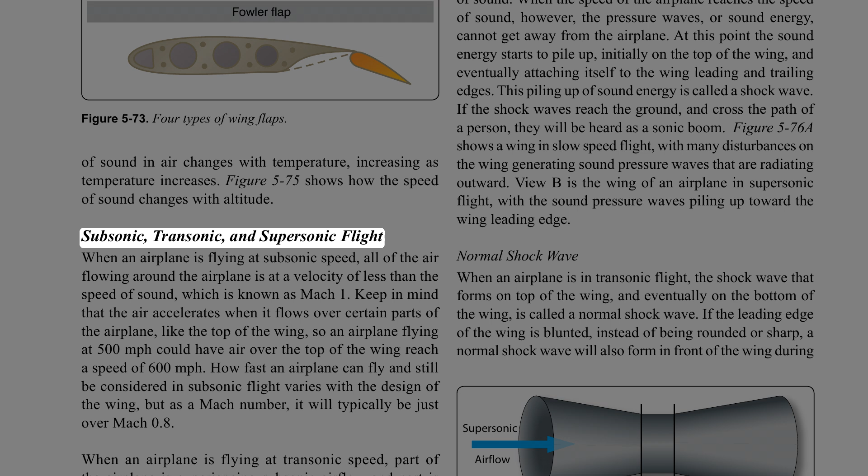Subsonic, transonic, and supersonic flight. When an airplane is flying at subsonic speed, all of the air flowing around the airplane is at a velocity of less than the speed of sound, which is known as Mach 1. Keep in mind that the air accelerates when it flows over certain parts of the airplane, like the top of the wing. So an airplane flying at 500 miles per hour could have air over the top of the wing reach a speed of 600 miles per hour.

How fast an airplane can fly and still be considered in subsonic flight varies with the design of the wing, but as a Mach number, it will typically be just over Mach 0.8.

When an airplane is flying at transonic speed, part of the airplane is experiencing subsonic airflow and part is experiencing supersonic airflow. Over the top of the wing, probably about halfway back, the velocity of the air will reach Mach 1 and a shock wave will form. The shock wave forms 90 degrees to the airflow and is known as a normal shock wave. Stability problems can be encountered during transonic flight because the shock wave can cause the airflow to separate from the wing.

The shock wave also causes the center of lift to shift aft, causing the nose to pitch down. The speed at which the shock wave forms is known as the critical Mach number. Transonic speed is typically between Mach 0.80 and 1.20.

When an airplane is flying at supersonic speed, the entire airplane is experiencing supersonic airflow. At this speed, the shock wave which formed on top of the wing during transonic flight has moved all the way aft and has attached itself to the wing trailing edge. Supersonic speed is from Mach 1.20 to 5.0. If an airplane flies faster than Mach 5, it is said to be in hypersonic flight.

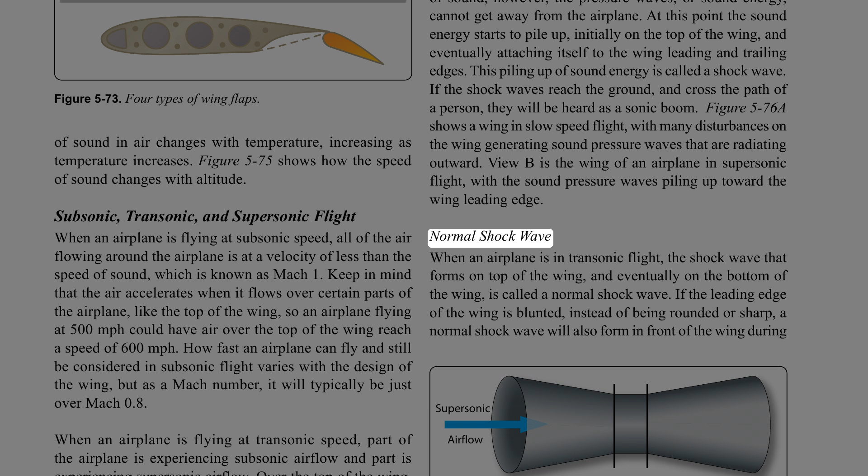Normal shock wave: when an airplane is in transonic flight, the shock wave that forms on top of the wing, and eventually on the bottom of the wing, is called a normal shock wave. If the leading edge of the wing is blunted, instead of being rounded or sharp, a normal shock wave will also form in front of the wing during supersonic flight.

Normal shock waves form perpendicular to the airstream. The velocity of the air behind a normal shock wave is subsonic, and the static pressure and density of the air are higher. Figure 5-77 shows a normal shock wave forming on the top of a wing.

Oblique shock wave: an airplane that is designed to fly supersonic will have very sharp-edged surfaces, in order to have the least amount of drag. When the airplane is in supersonic flight, the sharp leading edge and trailing edge of the wing will have shock waves attached to them. These shock waves are known as oblique shock waves.

Behind an oblique shock wave, the velocity of the air is lower, but still supersonic, and the static pressure and density are higher. Figure 5-78 shows an oblique shock wave on the leading and trailing edges of a supersonic airfoil.

Expansion wave: earlier in the discussion of high-speed aerodynamics, it was stated that air at supersonic speed acts like a compressible fluid. For this reason, supersonic air, when given the opportunity, wants to expand outward.

When supersonic air is flowing over the top of a wing, and the wing surface turns away from the direction of flow, the air will expand and follow the new direction. An expansion wave will occur at the point where the direction of flow changes. Behind the expansion wave, the velocity increases, and the static pressure and density decrease.

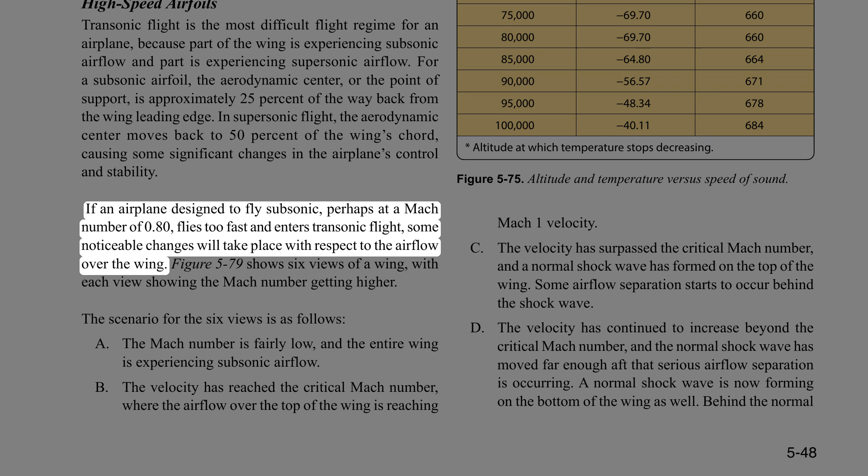If an airplane designed to fly subsonic, perhaps at a Mach number of 0.80, flies too fast and enters transonic flight, some noticeable changes will take place with respect to the airflow over the wing. Figure 5-79 shows 6 views of a wing, with each view showing the Mach number getting higher. The scenario for the 6 views is as follows.

A: the Mach number is fairly low, and the entire wing is experiencing subsonic airflow. B: the velocity has reached the critical Mach number, where the airflow over the top of the wing is reaching Mach 1 velocity. C...

The velocity has surpassed the critical Mach number, and a normal shock wave has formed on the top of the wing. Some airflow separation starts to occur behind the shock wave.

D. The velocity has continued to increase beyond the critical Mach number, and the normal shock wave has moved far enough aft that serious airflow separation is occurring. A normal shock wave is now forming on the bottom of the wing as well. Behind the normal shock waves, the velocity of the air is subsonic and the static pressure has increased.

E. The velocity has increased to the point that both shock waves on the wing, top and bottom, have moved to the back of the wing and attached to the trailing edge. Some airflow separation is still occurring.

F. The forward velocity of the airfoil is greater than Mach 1, and a new shock wave has formed just forward of the leading edge of the wing. If the wing has a sharp leading edge, the shock wave will attach itself to the sharp edge.

The airfoil shown in Figure 5-79 is not properly designed to handle supersonic airflow. The bow wave in front of the wing leading edge of view F would be attached to the leading edge if the wing was a double wedge or biconvex design. These two wing designs are shown in Figure 5-80.

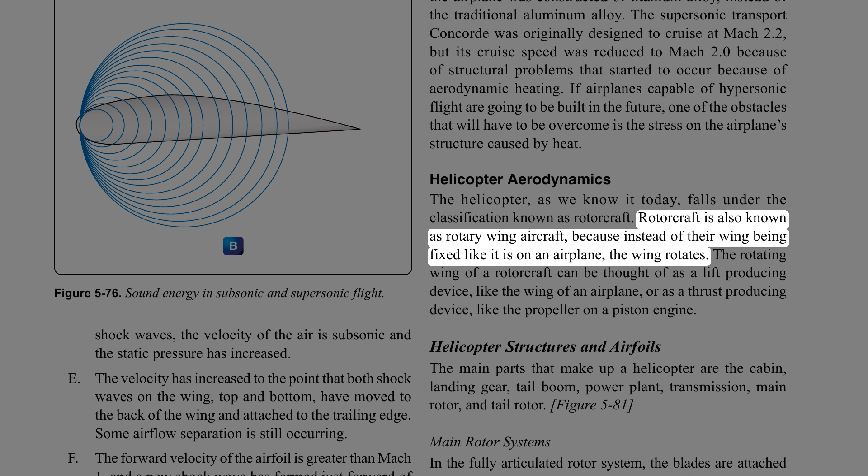Helicopter aerodynamics. The helicopter, as we know it today, falls under the classification known as rotorcraft. Rotorcraft is also known as rotary wing aircraft, because instead of their wing being fixed like it is on an airplane, the wing rotates. The rotating wing of a rotorcraft can be thought of as a lift-producing device, like the wing of an airplane, or as a thrust-producing device, like the propeller on a piston engine.

Helicopter structures and airfoils. The main parts that make up a helicopter are the cabin, landing gear, tail boom, power plant, transmission, main rotor, and tail rotor.

The hinge that allows the blades to move up and down is called the flap hinge, and movement around this hinge is called flap. The hinge that allows the blades to move fore and aft is called a drag or lag hinge. Movement around this hinge is called dragging, lead, lag, or hunting. These hinges and their associated movement are shown in Figure 5-82.

The main rotor head of a Eurocopter Model 725 is shown in Figure 5-83, with the drag hinge and pitch change rods visible. The semi-rigid rotor system is used with a two-blade main rotor.

The blades are rigidly attached to the hub, with the hub and blades able to teeter like a seesaw. The teetering action allows the blades to flap, with one blade dropping down while the other blade rises. The blades are able to change pitch independently of each other.

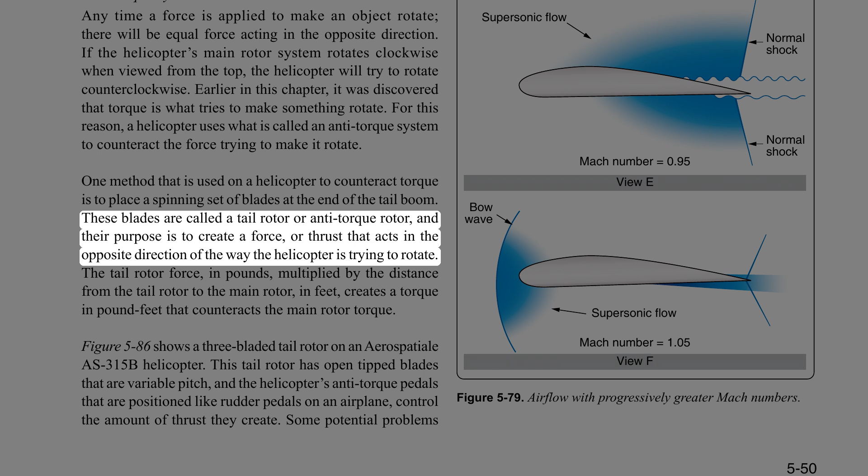Anti-torque systems. Anytime a force is applied to make an object rotate, there will be equal force acting in the opposite direction. If the helicopter's main rotor system rotates clockwise when viewed from the top, the helicopter will try to rotate counterclockwise. Torque is what tries to make something rotate, so a helicopter uses an anti-torque system to counteract this force. One method is to place a spinning set of blades at the end of the tail boom. These blades are called a tail rotor or anti-torque rotor, and their purpose is to create a force, or thrust, that acts in the opposite direction of the way the helicopter is trying to rotate.

The tail rotor force, in pounds, multiplied by the distance from the tail rotor to the main rotor, in feet, creates a torque in pound-feet that counteracts the main rotor torque. Figure 5-86 shows a three-bladed tail rotor on an Aerospatiale AS315B helicopter. This tail rotor has open-tipped blades that are variable pitch, and the helicopter's anti-torque pedals, positioned like rudder pedals on an airplane, control the amount of thrust they create.

Some potential problems with this tail rotor system are as follows. The spinning blades are deadly if someone walks into them. When the helicopter is in forward flight and a vertical fin may be in use to counteract torque, the tail rotor robs engine power and creates drag.

An alternative to the tail rotor is a type of anti-torque rotor known as a fenestron, or fan in tail design, as seen in Figure 5-87. The rotating blades present less of a hazard to personnel on the ground and they create less drag in flight, because they are enclosed in a shroud.

A third method of counteracting the torque of the helicopter's main rotor is a technique called the no-tail rotor system, or NOTAR. This system uses a high volume of air at low pressure, which comes from a fan driven by the helicopter's engine. The fan forces air into the tail boom, where a portion of it exits out of slots on the right side of the boom and, in conjunction with the main rotor downwash, creates a phenomenon called the Coanda effect. The air coming out of the slots on the right side of the boom causes a higher velocity, and therefore lower pressure, on that side of the boom.

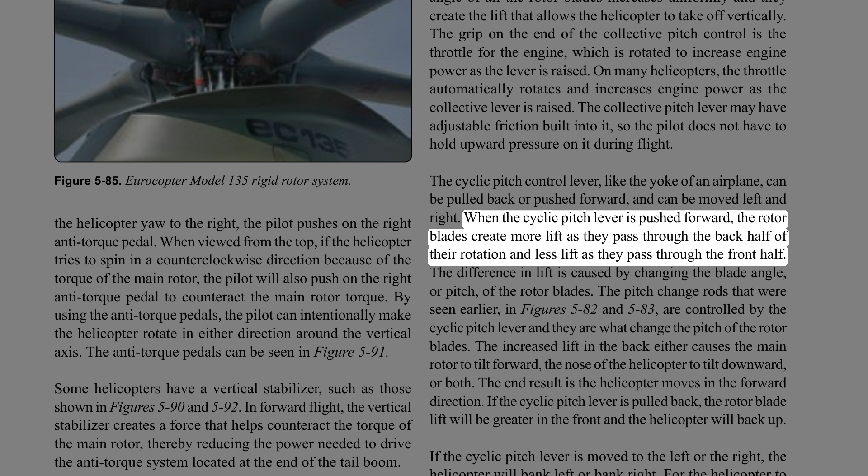The cyclic pitch control lever, like the yoke of an airplane, can be pulled back or pushed forward, and can be moved left and right. When the cyclic pitch lever is pushed forward, the rotor blades create more lift as they pass through the back half of their rotation and less lift as they pass through the front half. The difference in lift is caused by changing the blade angle, or pitch, of the rotor blades.

The pitch change rods that were seen earlier, in Figures 5-82 and 5-83, are controlled by the cyclic pitch lever and they are what change the pitch of the rotor blades. The increased lift in the back either causes the main rotor to tilt forward, the nose of the helicopter to tilt downward, or both. The end result is the helicopter moves in the forward direction.

If the cyclic pitch lever is pulled back, the rotor blade lift will be greater in the front and the helicopter will back up. If the cyclic pitch lever is moved to the left or the right, the helicopter will bank left or bank right.

For the helicopter to bank to the right, the main rotor blades must create more lift as they pass by the left side of the helicopter. Just the opposite is true if the helicopter is banking to the left. By creating more lift in the back than in the front, and more lift on the left than on the right, the helicopter can be in forward flight and banking to the right.

In Figure 5-92, an Agusta A109 can be seen in forward flight and banking to the right. The rotor blade in the rear and the one on the left are both in an upward raised position, meaning they have both experienced the condition called flap.

Some helicopters use a horizontal stabilizer, similar to what is seen on an airplane, to help provide additional stability around the lateral axis. A horizontal stabilizer can be seen on the Agusta A109 in Figure 5-92.

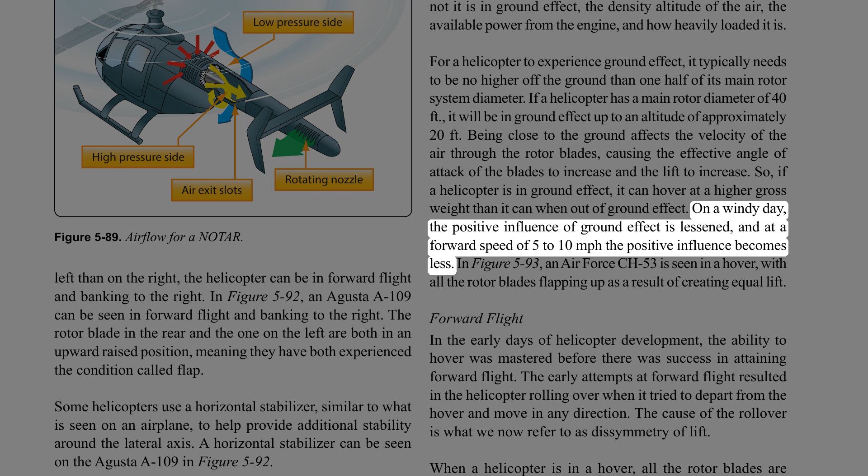On a windy day, the positive influence of ground effect is lessened, and at a forward speed of 5 to 10 miles per hour the positive influence becomes less. In Figure 5-93, an Air Force CH-53 is seen in a hover, with all the rotor blades flapping up as a result of creating equal lift.

Forward flight. In the early days of helicopter development, the ability to hover was mastered before there was success in attaining forward flight. The early attempts at forward flight resulted in the helicopter rolling over when it tried to depart from the hover and move in any direction.

The cause of the rollover is what we now refer to as dissymmetry of lift. When a helicopter is in a hover, all the rotor blades are experiencing the same velocity of airflow, and the velocity of the airflow seen by the rotor blades changes when the helicopter starts to move.

For helicopters built in the United States, the main rotor blades turn in a counterclockwise direction when viewed from the top. As the blades move around the right side of the helicopter, they are moving toward the nose. As they move around the left side of the helicopter, they are moving toward the tail.

When the helicopter starts moving forward, the blade on the right side is moving toward the relative wind, and the blade on the left side is moving away from the relative wind. This causes the blade on the right side to create more lift and the blade on the left side to create less lift. Figure 5-94 shows how this occurs.

In Figure 5-94, blade number 2 would be called the advancing blade, and blade number 1 would be called the retreating blade. The advancing blade is moving toward the relative wind, and therefore experiences a greater velocity of airflow. The increased lift created by the blade on the right side will try to roll the helicopter to the left. If this condition is allowed to exist, it will ultimately lead to the helicopter crashing.

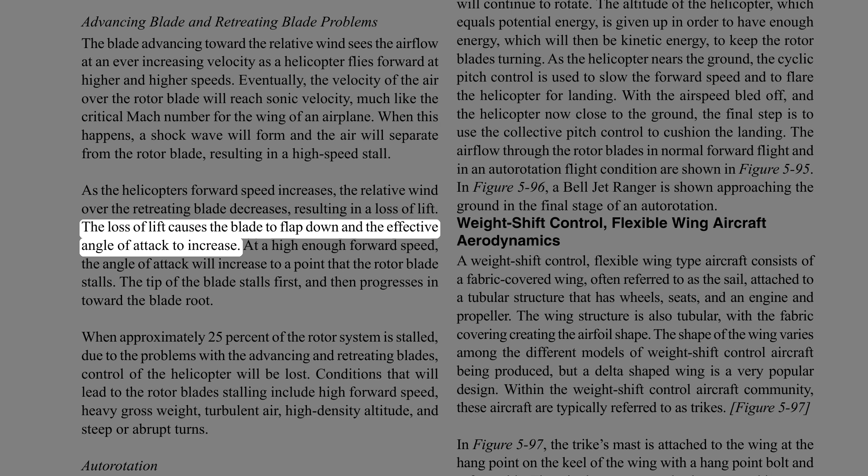As the helicopter's forward speed increases, the relative wind over the retreating blade decreases, resulting in a loss of lift. The loss of lift causes the blade to flap down and the effective angle of attack to increase. At a high enough forward speed, the angle of attack will increase to a point that the rotor blade stalls. The tip of the blade stalls first, and then progresses in toward the blade root.

When approximately 25% of the rotor system is stalled, due to the problems with the advancing and retreating blades, control of the helicopter will be lost. Conditions that will lead to the rotor blades stalling include high forward speed, heavy gross weight, turbulent air, high density altitude, and steep or abrupt turns.

Autorotation. The engine on a helicopter drives the main rotor system by way of a clutch and a transmission. The clutch allows the engine to be running and the rotor system not to be turning, while the helicopter is on the ground, and it also allows the rotor system to disconnect from the engine while in flight, if the engine fails.

Having the rotor system disconnect from the engine in the event of an engine failure is necessary if the helicopter is to be capable of a flight condition called autorotation. Autorotation is a flight condition where the main rotor blades are driven by the force of the relative wind passing through the blades, rather than by the engine.

This flight condition is similar to an airplane gliding if its engine fails while in flight. As long as the helicopter maintains forward airspeed while decreasing altitude, and the pilot lowers the blade angle with the collective pitch, the rotor blades will continue to rotate. The altitude of the helicopter, which equals potential energy, is given up in order to have enough energy, which will then be kinetic energy, to keep the rotor blades turning.

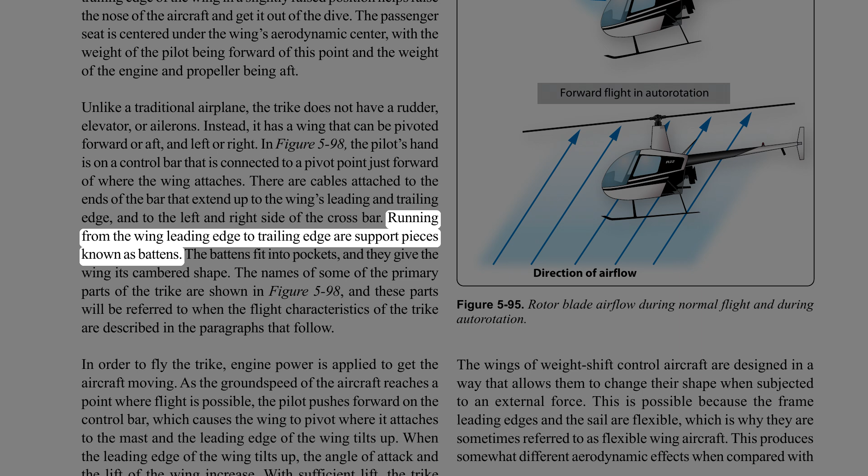Running from the wing leading edge to trailing edge are support pieces known as battens. The battens fit into pockets, and they give the wing its cambered shape. The names of some of the primary parts of the trike are shown in Figure 5-98, and these parts will be referred to when the flight characteristics of the trike are described in the paragraphs that follow.

In order to fly the trike, engine power is applied to get the aircraft moving. As the ground speed of the aircraft reaches a point where flight is possible, the pilot pushes forward on the control bar, which causes the wing to pivot where it attaches to the mast and the leading edge of the wing tilts up. When the leading edge of the wing tilts up, the angle of attack and the lift of the wing increase. With sufficient lift, the trike rotates and starts climbing.

Pulling back on the bar reduces the angle of attack, and allows the aircraft to stop climbing and to fly straight and level.

Once the trike is in level flight, airspeed can be increased or decreased by adding engine power or taking away engine power by use of the throttle.

Stability in flight along the longitudinal axis, which is a nose-to-tail measurement, for a typical airplane is achieved by having the horizontal stabilizer and elevator generate a force that balances out the airplane's nose-heavy tendency. The trike must create stability along the longitudinal axis in a different way because it does not have a horizontal stabilizer or elevator. The trike has a swept-back delta wing, with the trailing edge of the wingtips located well aft of the aircraft's center of gravity.

Pressure acting on the tips of the delta wing creates the force that balances out the nose-heavy tendency. The wings of weight shift control aircraft are designed in a way that allows them to change their shape when subjected to an external force.

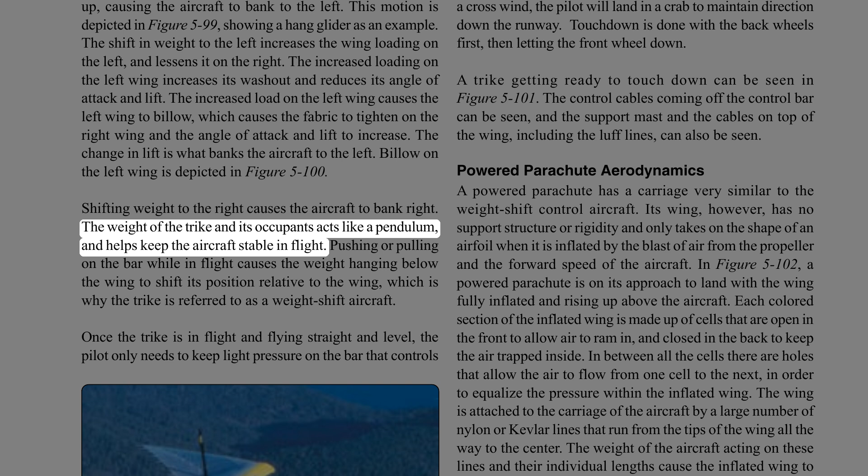Billow on the left wing is depicted in Figure 5-100. Shifting weight to the right causes the aircraft to bank right. The weight of the trike and its occupants acts like a pendulum, and helps keep the aircraft stable in flight.

Pushing or pulling on the bar while in flight causes the weight hanging below the wing to shift its position relative to the wing, which is why the trike is referred to as a weight shift aircraft. Once the trike is in flight and flying straight and level, the pilot only needs to keep light pressure on the bar that controls the wing.

If the trike is properly balanced and there is no air turbulence, the aircraft will remain stable even if the pilot's hands are removed from the bar.

The same as with any airplane, increasing engine power will make the aircraft climb and decreasing power will make it descend. The throttle is typically controlled with a foot pedal, like a gas pedal in an automobile.

A trike lands in a manner very similar to an airplane. When it is time to land, the pilot reduces engine power with the foot-operated throttle, causing airspeed and wing lift to decrease. As the trike descends, the rate of descent can be controlled by pushing forward or pulling back on the bar, and varying engine power.

When the trike is almost to the point of touchdown, the engine power will be reduced and the angle of attack of the wing will be increased, to cushion the descent and provide a smooth landing. If the aircraft is trying to land in a very strong crosswind, the landing may not be so smooth.

When landing in a crosswind, the pilot will land in a crab to maintain direction down the runway. Touchdown is done with the back wheels first, then letting the front wheel down. A trike getting ready to touch down can be seen in Figure 5-101.

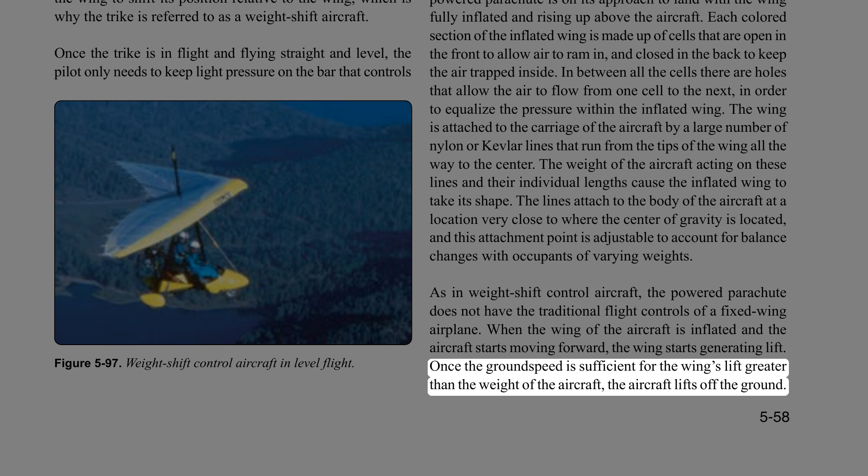As in weight shift control aircraft, the powered parachute does not have the traditional flight controls of a fixed-wing airplane. When the wing of the aircraft is inflated and the aircraft starts moving forward, the wing starts generating lift. Once the ground speed is sufficient for the wing's lift to be greater than the weight of the aircraft, the aircraft lifts off the ground. Unlike an airplane, where the pilot has a lot of control over when the airplane rotates by deciding when to pull back on the yoke, the powered parachute will not take off until it reaches a specific airspeed.

The powered parachute will typically lift off the ground at a speed somewhere between 28 and 30 miles per hour, and will have airspeed in flight of approximately 30 miles per hour.

Once the powered parachute is in flight, control over climbing and descending is handled with engine power. Advancing the throttle makes the aircraft climb, and retarding the throttle makes it descend. The inflated wing creates a lot of drag in flight, so reducing the engine power creates a very controllable descent of the aircraft. The throttle, for controlling engine power, is typically located on the right-hand side of the pilot.

Turning of the powered parachute in flight is handled by foot-operated pedals, or steering bars, located at the front of the aircraft. These bars can be seen in figure 5-103. Each foot-operated pedal controls a set of lines, usually made from nylon, that runs up to the trailing edge of each wingtip. When the right foot pedal is pushed, the line pulls down on the trailing edge of the right wingtip. As the trailing edge of the right wing drops down, drag is increased on the right side and the aircraft turns right. When pressure is taken off the foot pedal, the drag in the entire airfoil equalizes and the aircraft resumes its straight and level flight.

To land a powered parachute, the first action the pilot takes is to reduce engine power and allow the aircraft to descend. With the power reduced to idle, the aircraft will descend at a rate of approximately 5 to 10 feet per second. As the aircraft approaches the ground, the descent rate can be lessened by increasing the engine power.